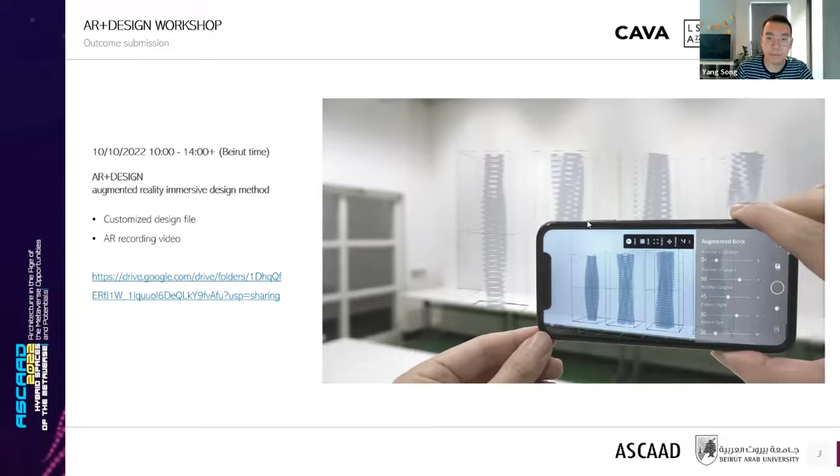Okay, so I will give a brief introduction about myself and my PhD research project in the University of Liverpool, because our workshop is a part of my preliminary research outcome.

So my name's Yang Song, and I got the master's degree of architecture from the Bartlett UCL, and I start to do the cross-disciplinary research related to architecture design and augmented reality technology. So now I'm a practice-based PhD student from the research group in CAVA, the Center of Architecture and Visual Arts, University of Liverpool.

So I continue my previous research direction and try to add the robotic fabrication technology into the AR-assisted workflow to explore the interaction between human, robots, and data and their mutual relationship through the immersive design to fabrication process.

So this research project is supervised by Professor Richard, who is the chair in architecture and visual arts. He is interested in digital database and immersive media, VR and AR technologies. And this research is also supervised by Asterios, who is the director of architecture school, and his research includes the parametric design, generative design, VR, AR, robotics, and digital fabrication.

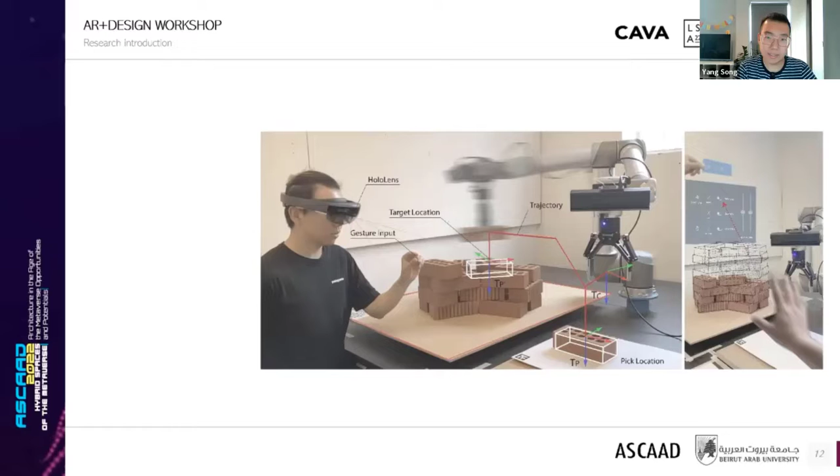The last phase is the AR-assisted human-robot collaboration method. We created a target location recognition system using the Kinect sensor RGBD camera to scan, recognize and analyze the brick location that needs to be picked in real time. Because I want to use this method on set, the bricks will be everywhere on set. I plugged the Kinect sensor into the robot, similarly to giving the robot eyes to see where the brick is, so we don't need any fixed feeding location to feed the bricks one by one. Instead, the robot can see where the brick is and just pick them automatically. So this is a method for the robot to read, and for the sensor to scan and try to extract the geometry of the brick.

After that, we also created a human-robot interactive collaboration method for adhesive application. The human worker can see the brick which is in operation as a white outline hologram, and also the area that needs the adhesive in red. So they just need to feed the adhesive in the red area and activate the robot to put the brick on. Actually, the red area is the overlapping area that's calculated by the computer. This method can avoid material waste and also keep the on-set environment clean.

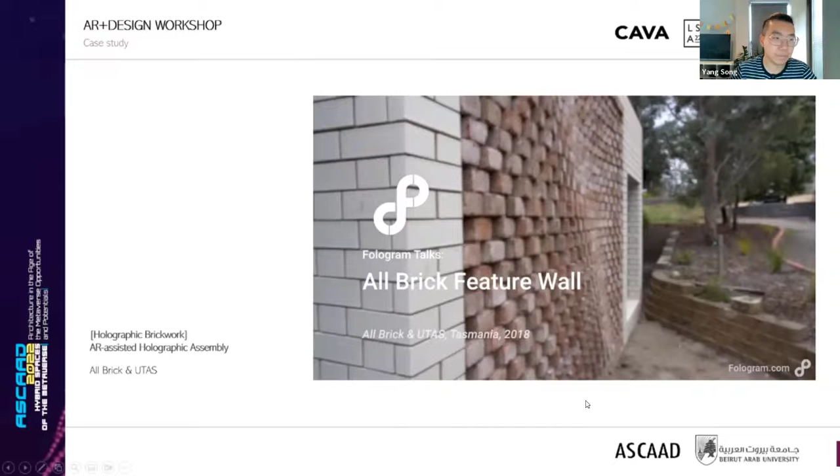University of Tasmania have been implementing Fologram in workshop scenarios, building complex brick structures, building complex timber structures, and working with it in a fabrication environment.

UTAS ran a workshop and invited Colin and his team at All Brick to come and try out the headset on some of the tricky geometry they were producing at the university. We heard that UTAS wanted to put the brickies to the test on this complex fabrication project, so we went down to see what they'd been up to.

There isn't a single brick on there that lines up to anything. Every brick is different. This would take you like 2 weeks, for one guy, and a lot of that would have to be made up, you know what I mean? You're not going to get it exactly like this would be.

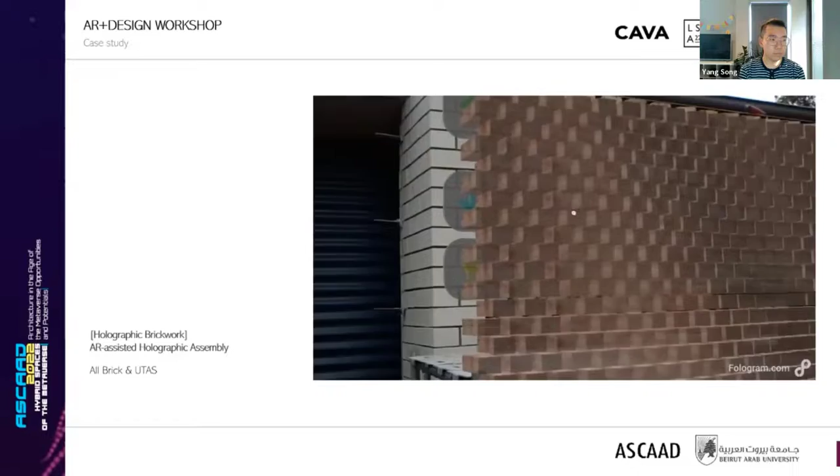UTAS provided a design model, and Colin used Fologram to turn that into a holographic instruction set. This lets Colin see the outline and precise placement of every single brick in the wall. Aside from using Fologram as an instruction set, Colin was also able to use it to train his apprentices.

So that's all the bricks, right? Yep, so see how you are here. That one's good. Yep, this one here shows it's got to come round. So just treat that like you do your string line all the way around. Mm-hmm, so hit that back.

It took us 2 bricklayers about 6.5 hours. The really exciting thing about this project is that now Colin and his team can approach architects and enable them to design more complex things, knowing that he has the capability to build them.

I was surprised by the accuracy and the fidelity to the digital model that Colin and his team were able to achieve. I'm really looking forward to seeing how Colin can work with architects to develop more complex structures, even more challenging than this one, and build them at a larger scale in permanent projects.

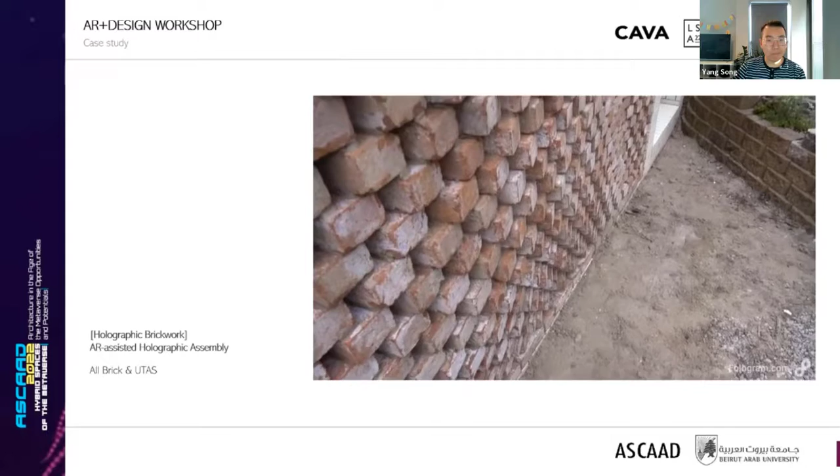I once seen a program on John Lennon, and he reckons every song he made, he used to get scared that he's going to stop now because he'll never make anything better than that. That's how I'm thinking - it's time to stop. I'm nervous that I can't make anything better.

The second case is the Steampunk pavilion, constructed from steam-bent hardwood using primitive hand tools, augmented with the precision of intelligent holographic guidance. The installation was built for the 5th edition of the Tallinn Architecture Biennale, ATB 2019, in Estonia. They were interested in approaches to hybridize analog construction with the precision and flexibility of digital models.

By rendering digital models as holographic overlays directly within the construction environment, the fabricator can use their own experience to produce highly complex objects entirely by following holographic guidance with relatively primitive analog tools. The timber elements in this structure are fabricated through the difficult process of steam bending, and each wood strip is backed, steamed, and bent over an adaptable frame of models, using the holographic models as a reference to the desired result.

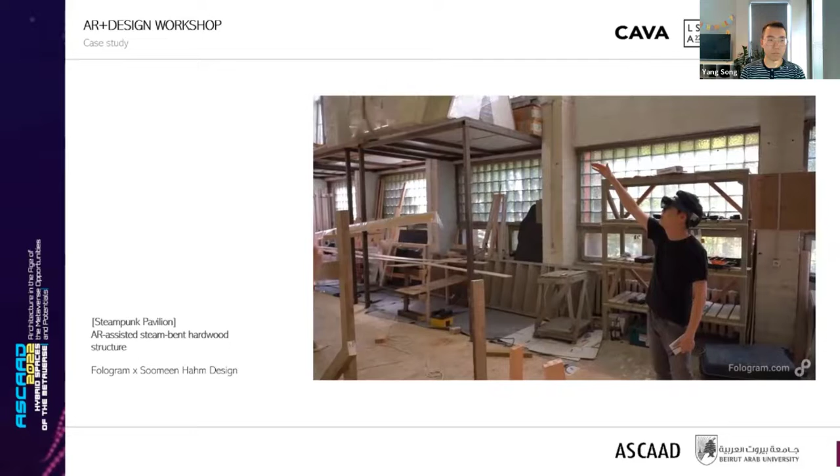Oh my god, here, it's up in here. I think it's almost 2 meters. Yeah, do you think we're going to be able to bend it over that? Let's try. Wow, this is not going to be easy.

Rather than working from drawings, a holographic model showed exactly where formwork needed to be placed in order to bend any of the curving timber strips in the design.

We added a holographic overlay to a metal bar bender in order to augment this cheap analog tool with the precision of digital models. A simple holographic interface was used to select and display the correct bend angles for each steel bracket in the structure.

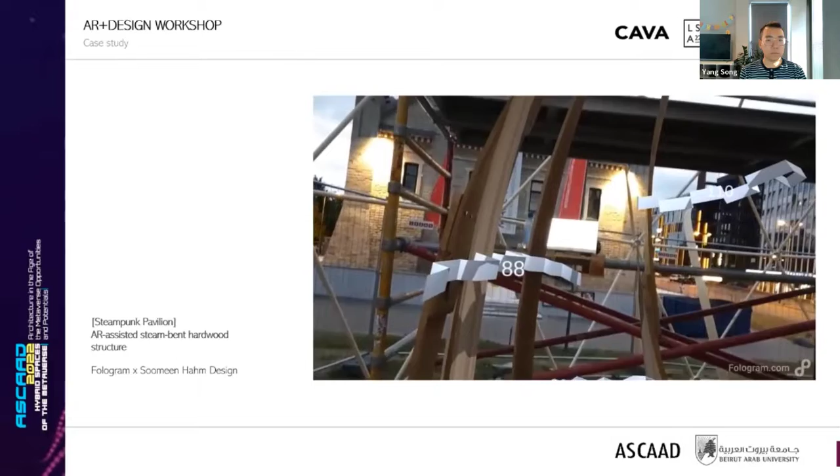These brackets were then located precisely in space using a holographic model overlaid directly on the construction site. This model provided a reference for what the pavilion should look like at any stage during construction, and we were surprised to find that small errors, either in the fabrication of parts or how these parts had been installed, were always able to be identified and corrected.

We, like everyone else, were expecting to have to change or simplify our design in order for it to be built. But we were surprised to find that by changing how we build, we're able to so significantly affect how and what we can design.

By combining precise digital models with adaptable human craftsmanship, we see exciting opportunities for traditional material practices to evolve. We're looking forward to seeing how other designers and architects can take Fologram's tools and begin to realize even more ambitious proposals, previously just the stuff of crazy dreams.

Yeah, and the third case study is a Build with Bark, which is a workshop done by Fologram. So they do the workshop in person because they need the AR headset to achieve that. So we can watch a video of what they are doing for that.

Australia has these incredible paperbark trees that get their name from the layers of thin bark that are kind of like this big stack of paper. Paperbark has an amazing variation in color and texture, and it's a completely renewable resource that you can find just about everywhere. I walk past these paperbark trees on my way to the office every single day, and then when I get into the office, there's even one right outside my window. It got me wondering whether we could build something with the bark.

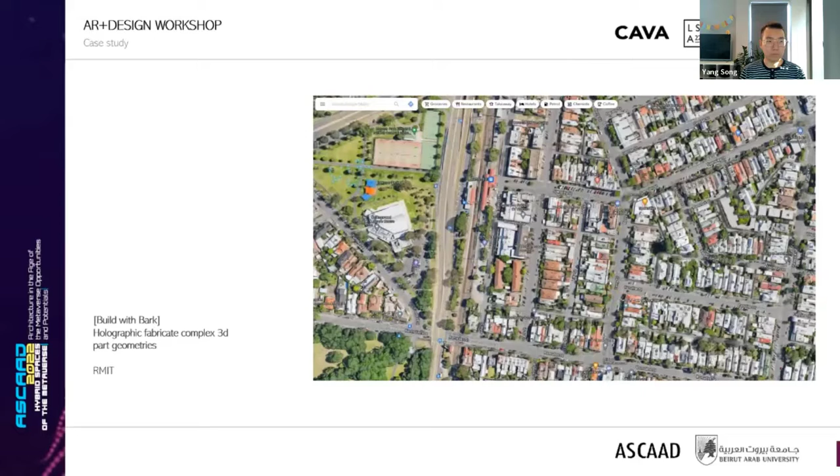So finding paperbark in Melbourne is pretty easy. You just check out a street on Google Street View, and if there's a melaleuca there, which is the scientific name for a paperbark tree, then you can go drop by and take a bit of material. It's really great being able to find all of the trees because then we only need to collect a small amount of material from each one, and that prevents us harming any of the trees by collecting too much bark.

Every single piece of bark is unique, and this is one reason why it would normally make such a crappy construction material. But in our case, this variation can also be an advantage. Different species and thicknesses of bark can be used to make a stiff but fragile curving frame that can then be covered with layers of laminated bark that become much stronger and start to hold their form.

For strength, whatever we design to be built out of paperbark needs to consist of a lot of areas of tight double curvature. This makes it pretty hard to design structures from paperbark just on the fly, making it up as you go, because you really need a guide while you're working, or everything just turns into a floppy mess.

Luckily, these curving forms are nice and easy to model in design software like Rhino, and together with architecture students from RMIT, we came up with a set of parts that fit together to form a bark wall. We used this digital model of the parts viewed in augmented reality as the guide that we needed for assembling bark into frames that were simultaneously clad to form nice stiff structures that could be transported into our office, where they're now a partition wall.

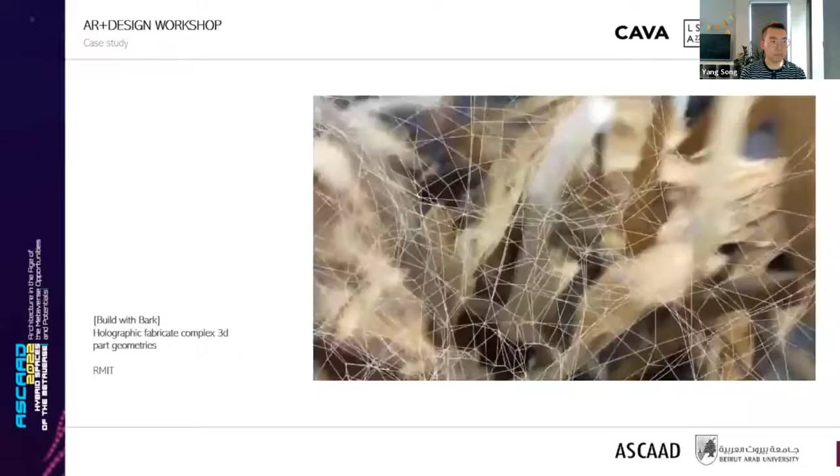Okay, so, yep. Here, clads from there to here. Yeah, so it goes sweep. Yeah, and then it goes a bit more. And then it tucks over and it donuts in here.

It's really hard to see what you're doing when you're only working from the wireframe in augmented reality, so we also used a depth camera on the HoloLens to scan the bark while we're assembling it and show how closely the bark matched our digital design.

The different colors and textures of the bark can be used to create a palette that doesn't exist in the digital model, which is just a flat grey surface, but is instead made up by the fabrication team on the fly. And so these sculptures capture both qualities of analog craft and the smooth curvature of the digital modeling software that was used to design them.

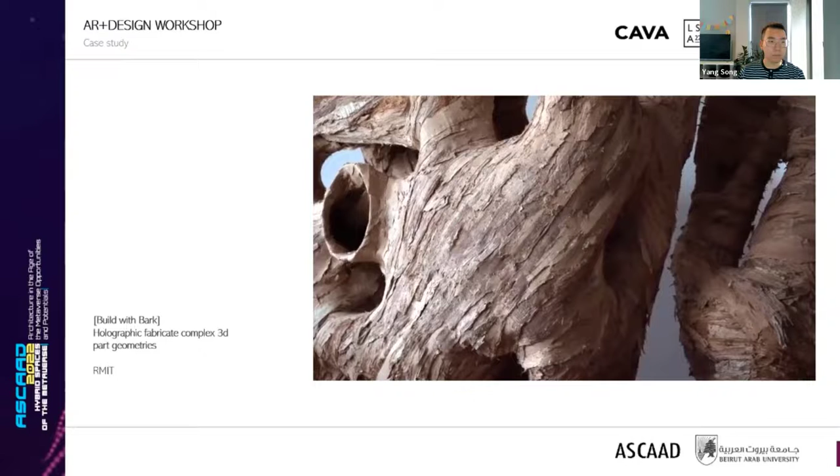This exact same technique of building curving structures from irregular materials in augmented reality could be applied to other found materials that are often overlooked, like river stones or other kind of granite material just collected from the bush, or branches from trees that have maybe fallen down and are irregular, unprocessed timber, or even material like bamboo in other parts of the world.

It could also work with conventional materials like strips of steel, and this might be a way to scale these processes up. Or, because the only tools required are the battery-powered HoloLens, some adhesive and some staples, continuing this project might involve taking the HoloLens to the bush and working directly with the bark on site rather than transporting the bark into our workshop and making a huge mess.

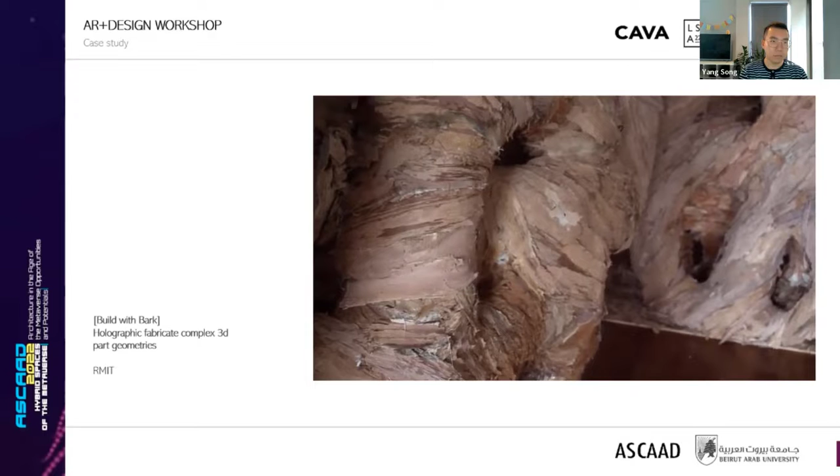And it would be amazing to randomly discover a strange bark shelter on a remote bushwalk somewhere, and this is the experience that we'd love to create.

So we saw three case studies done by Fologram in the AR environment because they are using Microsoft HoloLens. So they have more advanced input methods or interactive methods, including real-time scanning or hand gesture inputs, something that we cannot do on our mobile phone.

But today we're gonna just try a very basic interaction about the AR input, like the screen-based input for the AR immersive design.

And if you are interested in AR, you can check the website, I'm gonna show the website here, which is called Fologram. I will copy this link into our chat. So this is the Fologram website.

They will publish several things that they've done using augmented reality. And it is also a great tool for you to achieve AR design and also AR fabrication through Rhino and Grasshopper, which is very architecturally friendly. So you don't need any other software to help you, just this plugin.

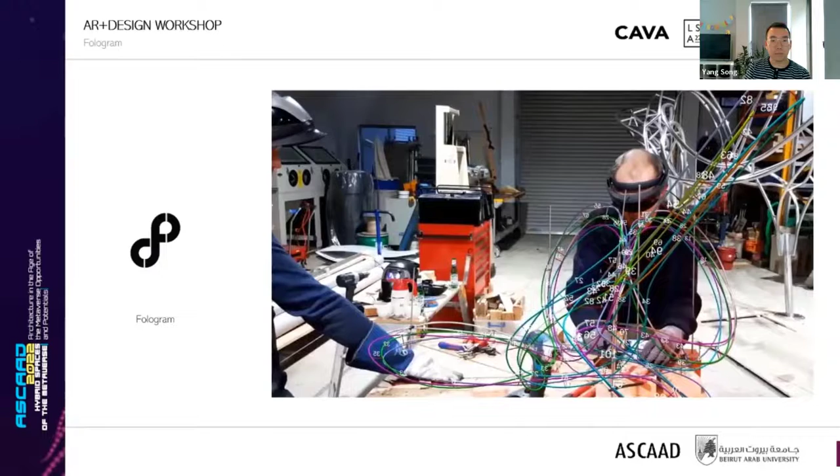Fologram is going to bring us into a new era of design. When you realise that what you're looking at is the thing that you're about to make, it almost becomes immediately intuitive. It's totally life-changing. To go from a sketch and then 3D modelling on the computer and then to produce this is just mind-boggling.

It's been exciting to see people realise ideas and designs which they thought would otherwise be impossible in minutes with Fologram. Drawings have always been seen as integral to the profession of architecture, but while they're incredibly good at describing two-dimensional geometries, they aren't good at describing non-planar geometries. Some of the models that we've been creating simply would not be possible to build in any other means.

So if you install the Fologram successfully, you will see a panel of the Fologram through your Rhino user interface on the right-hand side. If you cannot see that panel, just type in the command line Fologram and activate that.

So when you activate the Fologram panel, you will see a purple button here. Press the button and it will generate a QR code for you. You can use your Fologram app to scan this QR code to connect the laptop with your mobile phone.

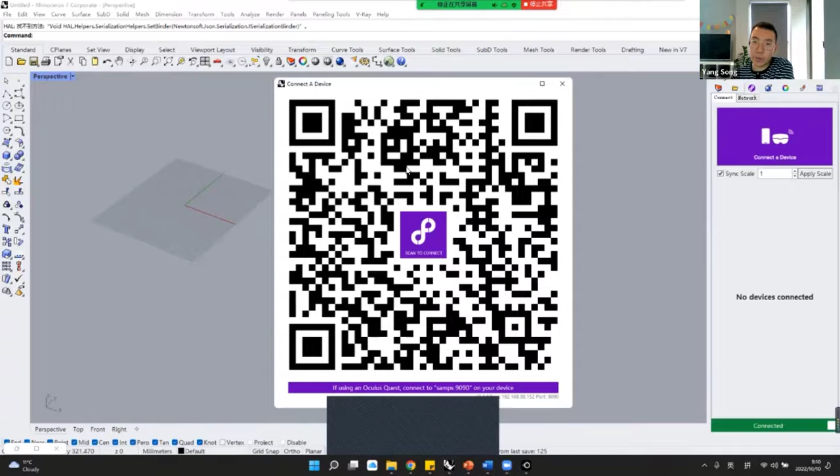Okay, this is Rhino. If you installed Fologram successfully, you will see a Fologram panel here. This is the button for us to generate the QR code. If you press that, there will be a QR code, and you can use a mobile phone to scan the QR code.

If you didn't see anything happen on this panel, just type Fologram to activate that. Maybe the first time you need to activate that first, and then you will see the panel here. You can also see a panel on the top, called Fologram, for you to activate the panel and also create QR code. So this is a great function.

Maybe some of you are thinking, if I put the virtual model in the physical world, where will it be located, or how can it be recognized? This QR code is a method for you to scan in the AR environment to locate your model. So to do that, click on create QR code.

They will ask you to input the origin. Normally we set the origin as 0,0,0. Then they will ask you the x-axis, just the x-axis same as Rhino, and a y-axis. So now you can see a QR code.

You can also choose the paper size to print the QR code, and here is a folder for you to save it. You can click the folder here and save the QR code. I'll just save it on the desktop and press enter. So the QR code will be generated and saved here.

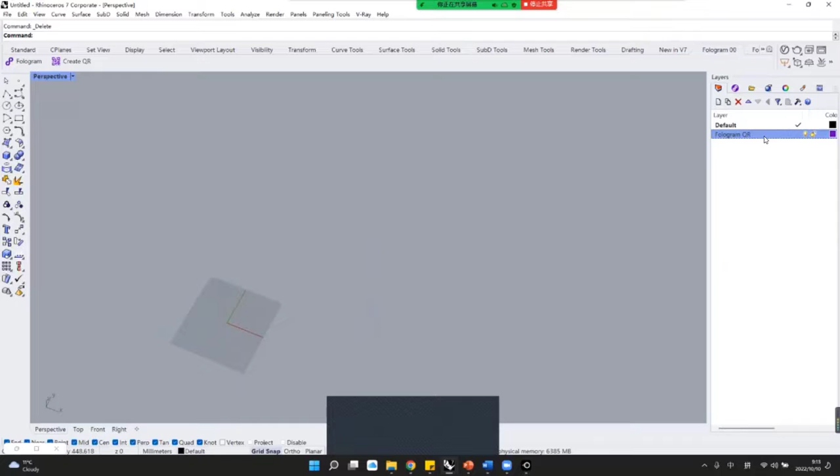I'm sorry, can you repeat from the set origin part? Okay, so this is a function on Fologram. Here is create QR code. Press that, and it asks you to set the QR code origin. You can use your mouse to set the origin as 0,0,0 here, at this corner.

If you want to be accurate, you can activate grid snap, so it will catch the 0,0,0 point automatically. Press your mouse here, that means you've set the origin. Then it asks you to set the x-axis, so just follow the Rhino x-axis. Press the mouse, and it will ask for the y-axis. Press the mouse, and here is the code.

For this input, you can set the paper size for printing, and this is the folder for you to save the QR code. You can select anywhere to save and press enter on your keyboard. Now the QR code is generated. You can print that and place it on the ground. When you scan the QR code through your mobile device, it will locate to the 0,0,0 point.

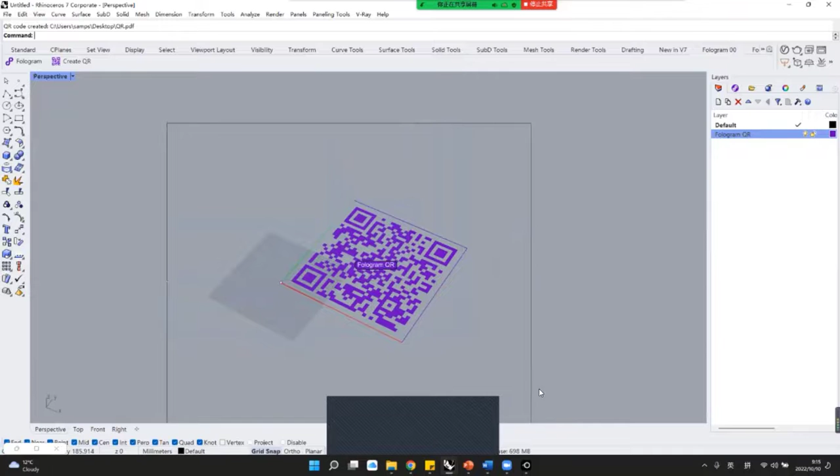It's because of your Wi-Fi settings. If that's not working, you can use your mobile data hotspot to connect your laptop and mobile phone. Okay, thank you. So this is the method for you to locate your model in the physical world. Yes, do you have any question?

Which version of Rhino are you using? It's Rhino 7 Corporate. Rhino 7 should work. You can just check the panel settings if the Fologram is not activated.

Okay, but when I type command Fologram, it gives me Fologram QR, Fologram update check, and when I press on Fologram QR, it gets me set QR code origin. That's the step you were explaining, but there is no icon for the Fologram popping up with the menus and other icons.

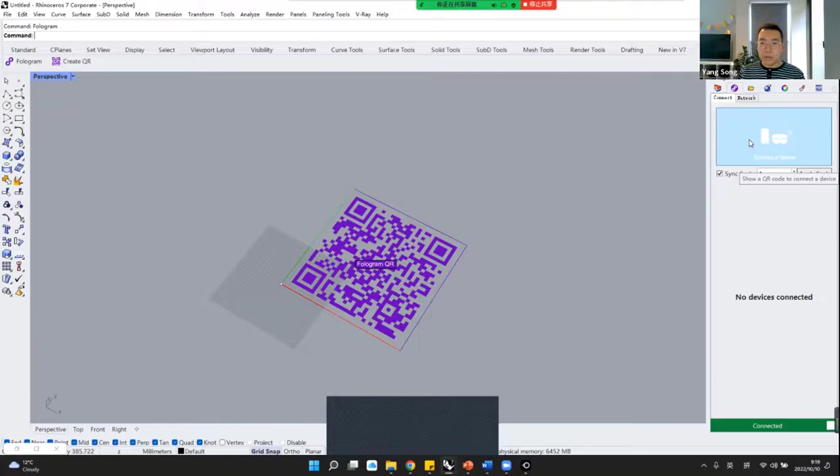No, I feel like the software is already installed because I connected with my phone, and my phone is giving me a hexagonal mesh for everything in my surroundings. That's why I knew Fologram is installed, because I scanned the QR code that was generated from my PC using the camera. Yes, using this. Yes, you can see that QR code. Yes. Okay, okay, so that should be fine.

You don't need to do that. This is a method icon, the method that I introduced for you to locate physical world with the digital model, but we don't need this function for now, for today. In the future, if you want to do any more accurate operations, you can use this kind of function. I'm just giving a basic introduction about the plugin.

Okay, thank you. So if you activate your Grasshopper, you will see the Fologram somewhere here. So these are the functions in the Fologram in Grasshopper. I'm gonna show you the first basic function: syncing objects, like how can we input the object into the AR environment?

For example, I'm gonna set a mesh. So you can choose mesh here, there is a mesh sphere. Press the mesh sphere here. It will ask you to input the base. We're going to use the default base as 0,0,0, and the radius, we're going to set the radius to 30. To set that, just double click anywhere you want, double click and input 30.

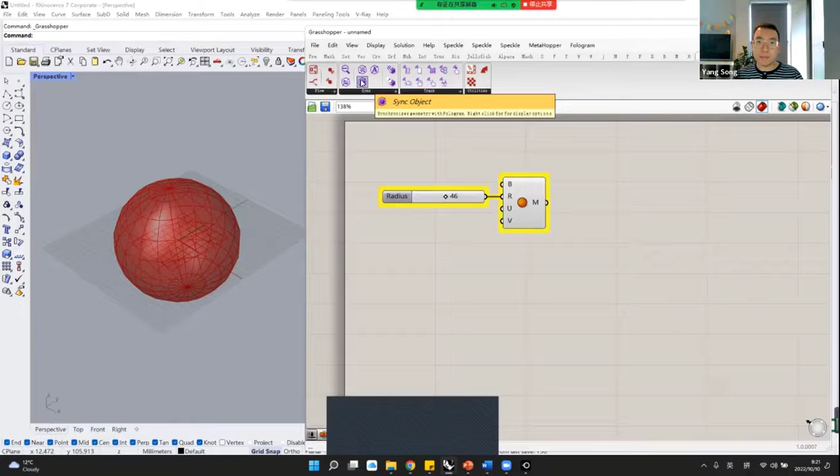You need a basic function from Fologram. Just press Fologram, and here is a sync object. Connect the sync object with your mesh. So actually now it is in the AR environment.

So I'm gonna show you how you can connect your mobile device to check this model in AR devices. I'm gonna share my mobile phone screen, one second. Yeah, so now you can see my mobile phone screen.

If you already installed the Fologram, you will see a Fologram here. Someone, can you mute? I will mute everyone. So you will see a Fologram app here. Just click this Fologram app.

And it asks you to scan the QR code. So for generating the QR code, press here, scan the QR code. Now you can see a mesh. The mesh means that your mobile phone is reading the environment. So you can tap on your mobile phone screen to set where you're gonna put this ball. I'm gonna just put that ball on my desk. So now you can see my ball is in the AR environment.

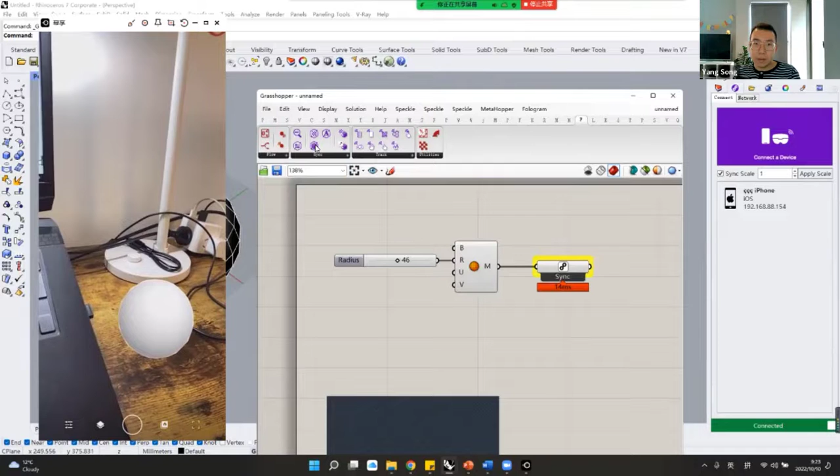Okay, so when you create a sphere here, find the function in Fologram in Grasshopper. There is a function called sync object here. If you press Fologram, choose the sync object, connect the output from M to the Fologram, and you will see your ball here.

I want to introduce something you can play with in this Fologram function. When you right-click that, you can see there is a function for you to play with the color. So actually, you can change the color of your sphere. And also, you can select a texture. I'm gonna maybe just randomly choose a photo. So now you can see your sphere has some interesting texture.

If you don't want that, just right-click, choose the texture again to delete the texture. So you can use that kind of function to play with the color, the texture, and also you can change the transparency here.

And there will be 3 more functions. Movable means if you click the movable, you can actually move your ball from the mobile screen. So for now, you can see I'm moving that from my mobile screen. This is a movable.

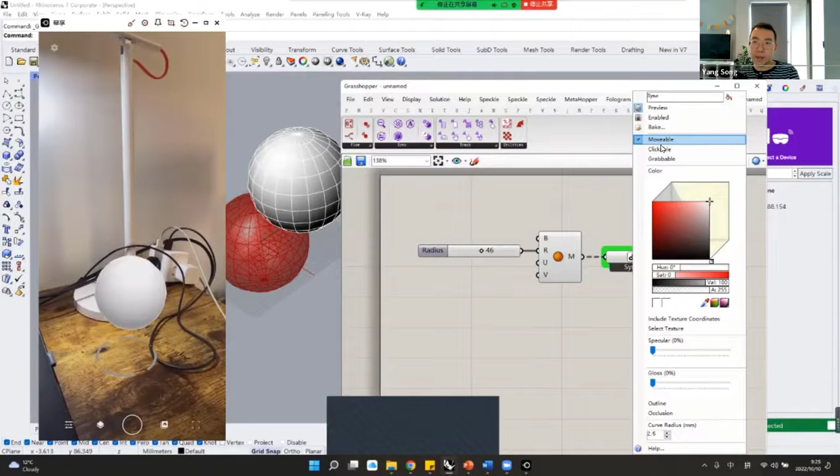So actually, you can see on Rhino, my ball is moving. So this is a function called movable. If you choose clickable, which means that the ball can be clicked.

So this is a function like if you have a series of balls, when you click one ball, you can get the index number of this ball. I will do that later. For now, you just need to know you can click this ball by choosing the clickable, and you can move that ball by choosing the movable.

And also you can grab the ball. But this one asks you to use the AR headset. We cannot do that through our mobile devices. So you can play with the first two for click and move. And also you can change the color, change the transparency, or add the texture for more fancy setting up.

So this is the first function that I'm gonna show you, which is the sync object. Please remember, for Fologram, it only reads mesh. So you need to create something from the mesh.

If you have some other geometry, just use a function called Mesh Brep here to change something into mesh. I will introduce that later. But for now, you need to remember that the Fologram reads mesh.

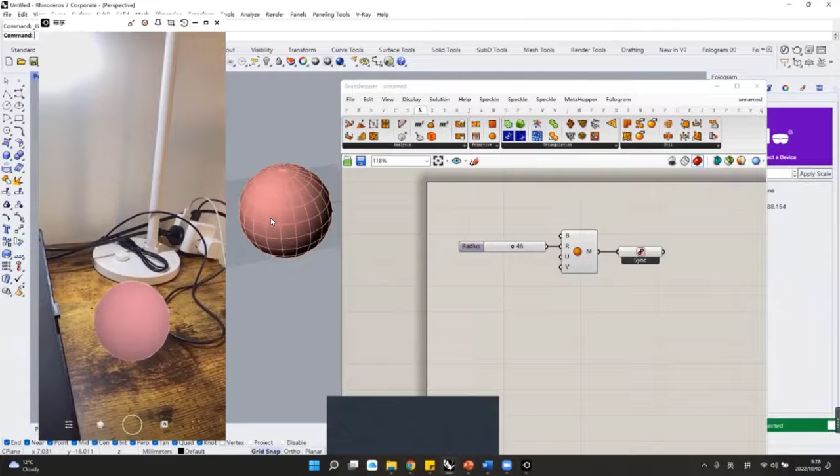So you can only see hexagons, but you cannot see your sphere? No, I can see it. I can see my sphere, and I can see the QR, like the rectangle perimeter of the QR code. The problem is that it's not as clean as your screen. It's always showing me the hexagons overlapping each other as if it's not really scanned.

Yeah, you can press the screen to select the surface, because the hexagon is scanning your surface. So if you want to put your sphere on the desk, you can just press on your mobile screen to press the desk. So the hexagon will disappear, which means that your sphere is snapped on the desk.

Thank you. Okay, so this is the first function that we're gonna try. And I will introduce a second function for you to try in the AR environment. So I'm gonna stop the mobile sharing.

Okay, the second one will be the syncing parameters. So we're gonna use the mesh sphere as well. Press here to create a mesh sphere, double click anywhere to input 30 as our radius.

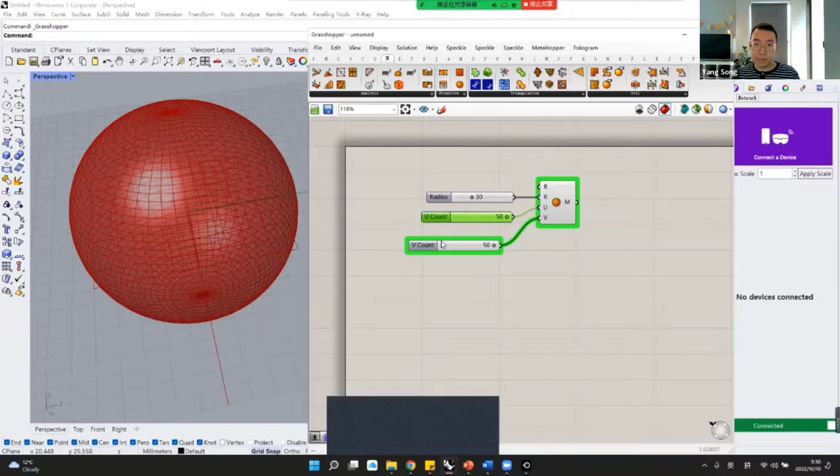So this is the way for you to create a sphere. And also we're gonna show the UV line. So how can we achieve that? In the mesh, here is a function called mesh edges. Just press that, connect the mesh with mesh edges.

And use Fologram sync object, show the sphere first, and sync object, show the edge. So I'm gonna set the sphere as white color, and I'm gonna set the edge as red color. So actually, in the AR environment, you can see a white sphere with red UV line.

And how to do the syncing parameters? There is a function called sync parameters. Press that, and you will see some Fologram logo on the interactive sliders. So you can activate the radius, activate the U and V.

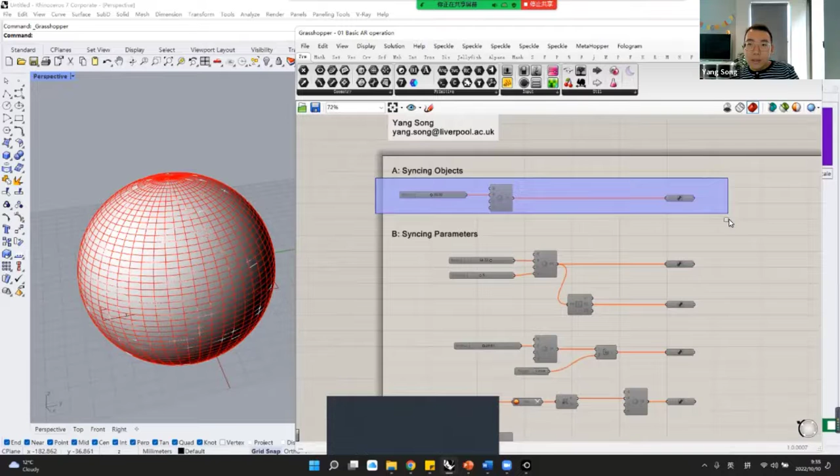This is the basic introduction, so you just need to get familiar with the function. For your own design, I will explain more clearly. There will be 1 or 2 parameters for you to play with, so don't worry about that. You don't need to develop anything in Grasshopper, you just need to play with it.

Okay, what I'm trying to show you is how you can input this kind of interactive sliders on your mobile device. I'm going to connect my mobile device again. I understand most of you don't know Grasshopper, but don't worry.

Now you can see my mobile screen. I will snap it on the top, press the Fologram app, scan the QR code. Yes, your sphere is here. So how can you achieve this kind of interactive parameters?

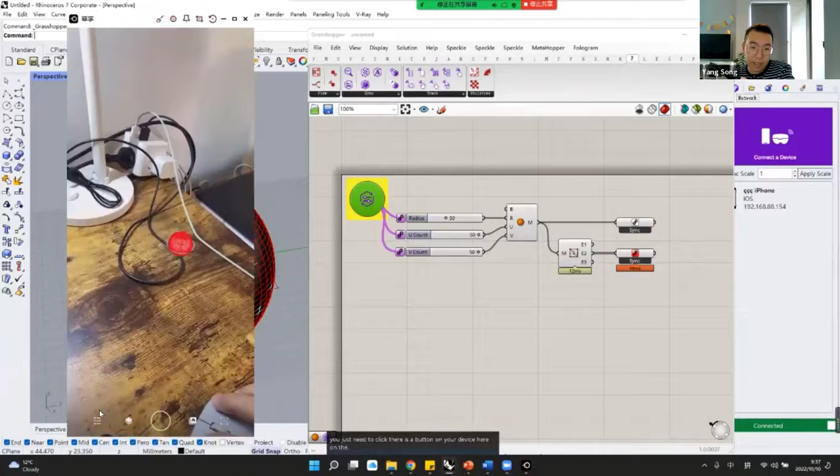You just need to click. There is a button on your AR device on the left-hand side. Click this button and you will see 3 sliders. Just play with the sliders and you can see your sphere is growing. It is very easy, and you can also change the UV line.

Excuse me, how did you connect the QR code again? Just as you connected it the first time? Yeah, to connect the QR code. Okay, I connected the QR code, but when I'm using the folder you gave us right now, you asked us to drag it to Grasshopper. It's not showing up on the Fologram on the phone. What's showing up is the initial sphere, the one I made.

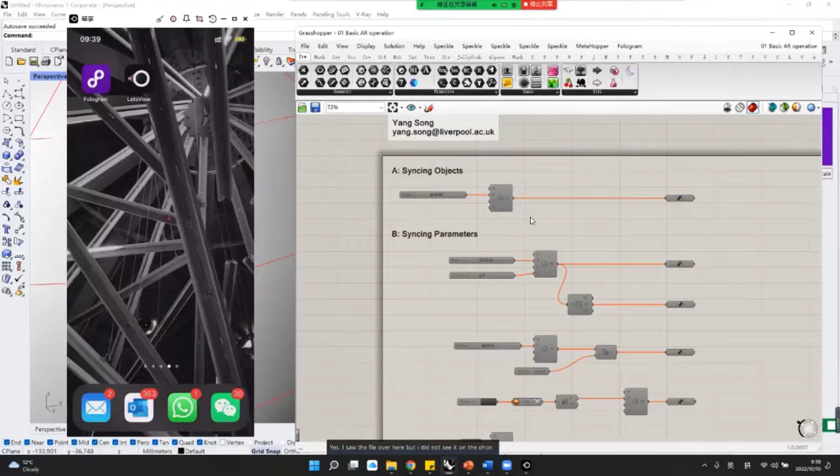One second, you mean you drag the file here and you cannot see the file? It won't happen that way, if you drag the file here you will see it. Yes, I saw the file over here, but I did not see it on the Fologram like you're seeing it on the phone, because the file is in Grasshopper. Okay, but now you reconnected it to the phone. It's not showing up on the phone right now, what's showing up is the initial sphere, not the folder you gave us. You need to stop your Fologram, just swipe that up and open it again. Oh okay, thank you.

Yeah, so this is a way for you to play with the interactive parameters. It's very fun. You can also try, if you have any Grasshopper knowledge, several other geometries like mesh box, mesh plane, mesh sphere, or some other things you create. It will be pretty easy for you to achieve in the AR environment.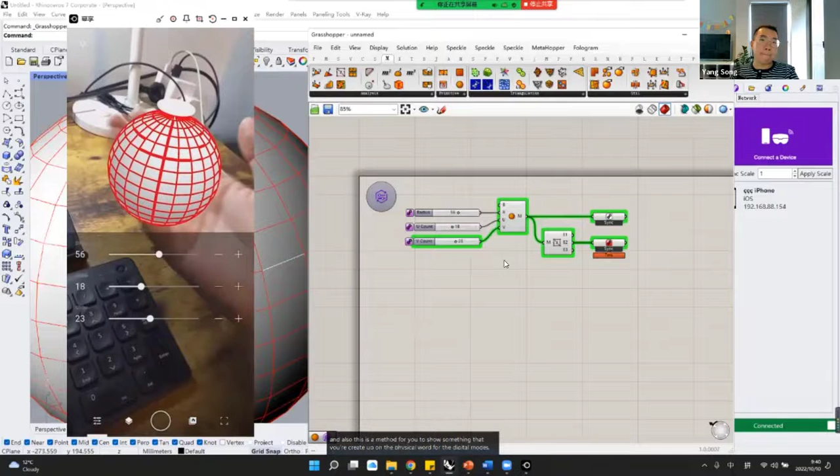This is also a method for you to show something that you create up on the physical world for the digital model. So remember, the function in Fologram called sync parameters gives you the possibility to take this kind of slider to the Fologram app, so you don't need to change that on Grasshopper, you can change it on your app. For the free version of Fologram app, you can only add 3 parameters. If you want more, you need to pay for the plugin and also pay for the app. But I think 3 parameters are enough for our workshop. So this is a method for syncing objects and also syncing parameters.

The next function that I'm gonna show you is... okay, I'll check... is syncing text. So how can we show the text in the AR environment?

First of all, we're gonna make a sphere. Press the mesh sphere, and we're gonna set the radius as 10. And we need to sync this, we need to show this sphere in AR environment. So we choose the function in Fologram, sync object, to show the sphere. And if we want to create a text, it will ask you for a reference point, so we're gonna use the sphere as a reference point.

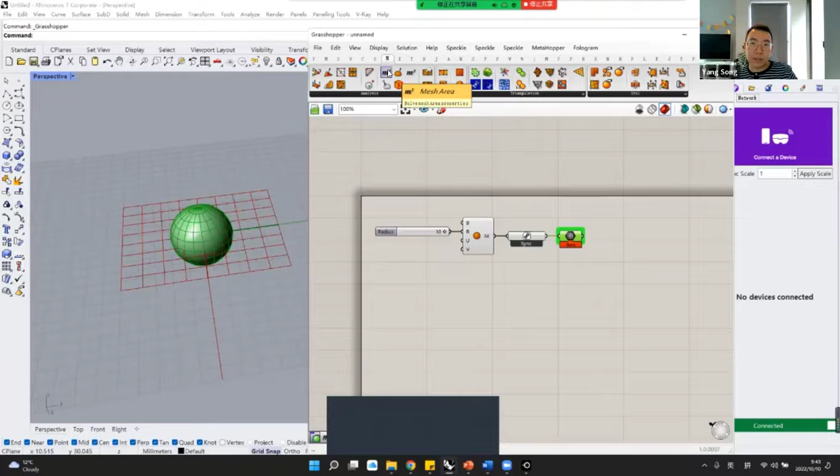So we go to the parameters, and there will be a function called mesh. Choose the mesh. And there will be another function called mesh area, which means it will get the central point of the mesh. Because now we have the mesh as a sphere, we need the central point as the reference. So now we got the reference and we got the sphere.

The last thing is to input the text. So we choose Fologram, there is a function called sync text. The T means text input, the P means reference point. So we're going to connect the C with the P, which means our reference point is the central point of the sphere, and the S means the text size. So we can double click at the empty area and input 50, which means the size of the text.

And if you want to input the text, go to the parameters. Here is a function called panel. Click the panel, double click to input the text that you want to show. I'm gonna say ASCAAD AR plus design workshop. So connect the text with the function here. You can see it shows the AR design workshop text, but I think it's too big, so I'm gonna reduce the size of the text to 20.

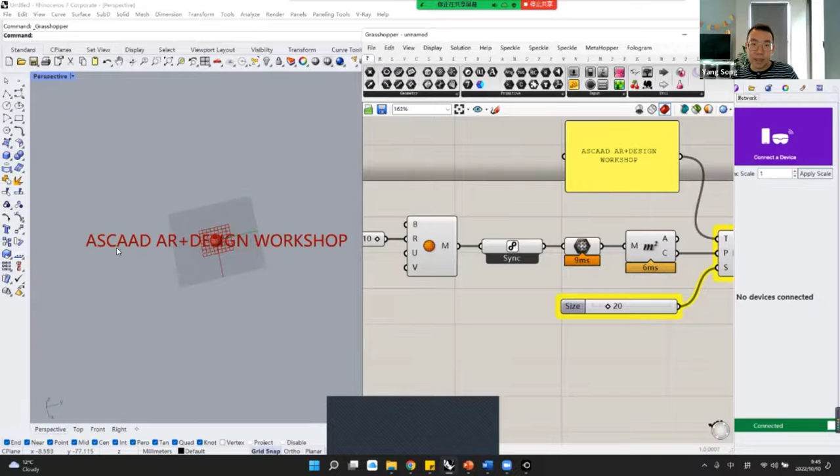So we can play with something more interesting, because remember before I introduced that the sphere can be moved. So we can right click here and choose that as movable. Actually in the AR environment, you can move the sphere anywhere you want, and the text will follow the sphere. So I'm gonna show you on my mobile device now.

I will connect my mobile device. Remember to restart your Fologram app anytime when you want to do a new thing, so it won't show you the previous design. So now I'm connecting my mobile device again.

Okay, this is my mobile screen. I'm gonna stop the Fologram and run it again. Snap the QR code, put my sphere on the desk. So for now, you can see there is a sphere and my text. Because I chose the sphere as movable, you can move the sphere through your mobile device. Maybe I will move it here, so you will see the text is following that.

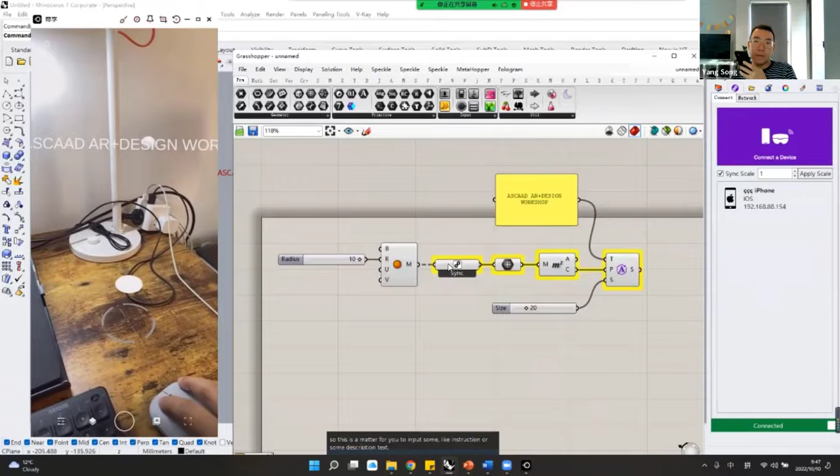So this is a method for you to input some instruction or description text. If you don't want to see the sphere, you can just reduce the radius, and the text will show by itself. So this is the way for you to show text. Now we already know how to see geometry and how to see text.

The next thing I want to show is that the Fologram gives you a function to track your own device. In the Fologram function, there is a function called connected devices. Press that, and there will be another function called track device. Press that, and connect the D with D.

So actually you can see on the Rhino file that your mobile phone is in the design software. It will change your physical mobile phone into the design environment, so you can real-time track your device. To get more interesting things, you can get the plane of your mobile phone, the mesh of your mobile phone, and also the central point of your mobile phone.

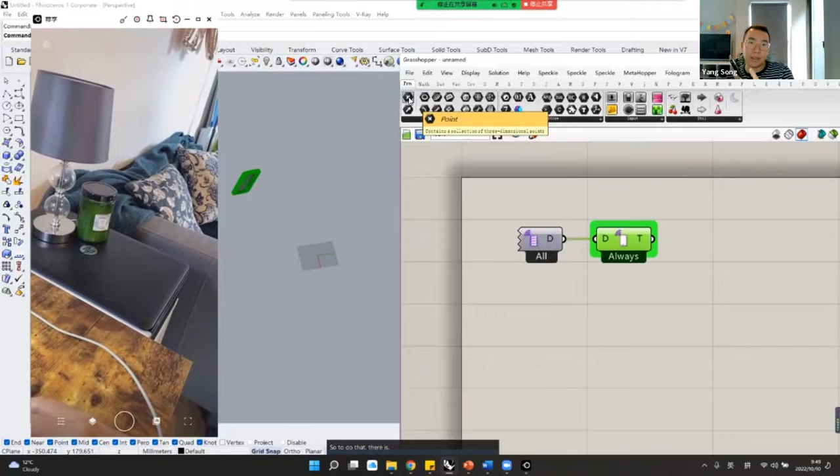To do that, there is a point in the parameter settings. Press the point to connect the T with the point, and this point will be the central point of your mobile phone. There is another function called plane - press the plane, connect the plane with the T, and if you zoom up, you can see your mobile phone plane, showing the x-axis and y-axis.

So you can use this method to set some points through your mobile phone, and actually it is recording your location. You can put your mobile phone somewhere and set connected points to create a curve or something, giving you interactive input methods. Fologram has this kind of function, but it's much more difficult than what we're going to learn today, so I won't introduce it fully, but you can know this is a method for you to input something with your mobile phone from the physical world into the digital design world.

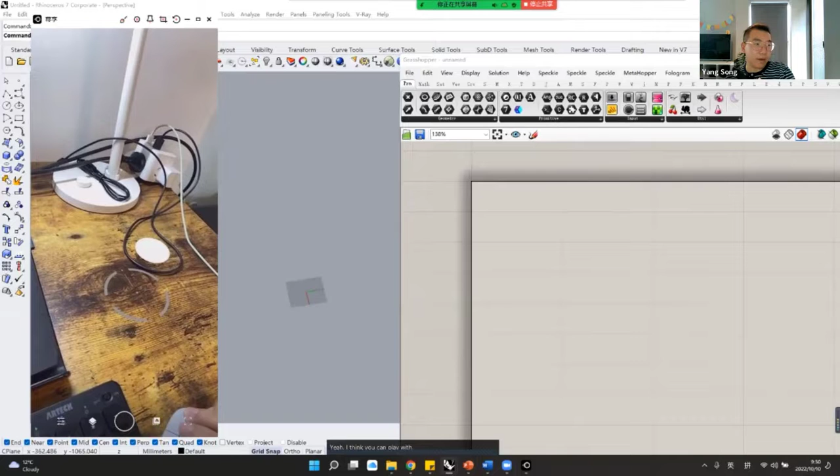I think you can play with the code that I shared with you - I shared more than I explained today. If you open my file, they will be here, and you can select all of them, press group on your mouse, and choose enable so you can activate this script to play with it.

This is showing objects, and disabling them to see the second one: syncing parameters, and also syncing text, and also interactive objects. I'm going to show you the interactive objects.

If you enable them, you will see a series of balls. This function gives you the possibility that if you press one ball, you can get the index number of that ball - meaning you are pressing ball number 2. So this is ball number 0, 1, 2, 3, 4, 5. Like that one is 10, and that one is 15.

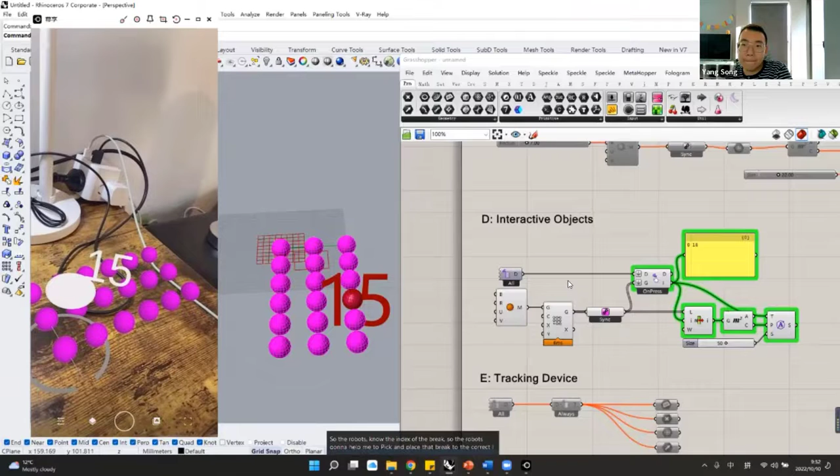This is a function that I use for robotic fabrication. For example, if I have a brick tower or a brick column, I can just press the brick which I want to do, so the robot knows the index of the brick, and the robot helps me pick and place that brick to the correct location. So these are many interesting functions that you can create or play with in the Fologram.

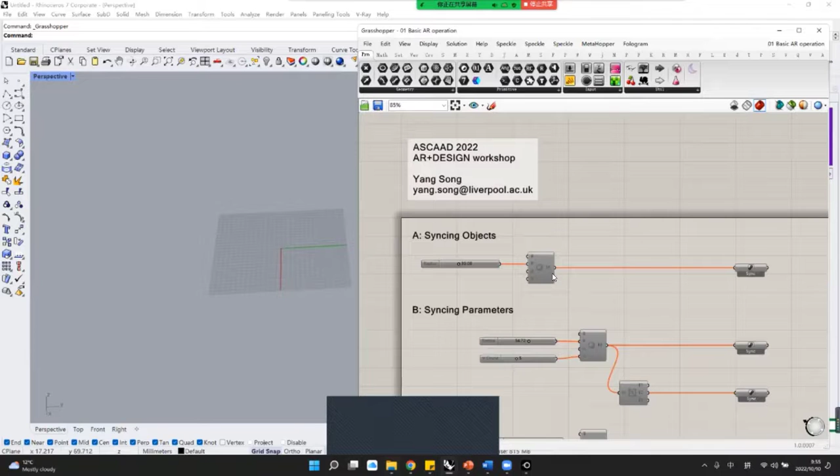Let me check, I'm going to stop sharing my screen. Can you share your screen to me? Yes, sure. I can't share my screen. You did not disable the... okay, now I can share.

Okay, can you see my screen now? It's loading, one second. Yes, I can see. Is the Grasshopper shown? I think you locked them. Press the unlock.

How can I unlock? Press your scroll, the scroll mouse. Yes, unlock them. Okay, thank you. Yeah, I think you enabled all of them, so try to disable all of them and enable them one by one.

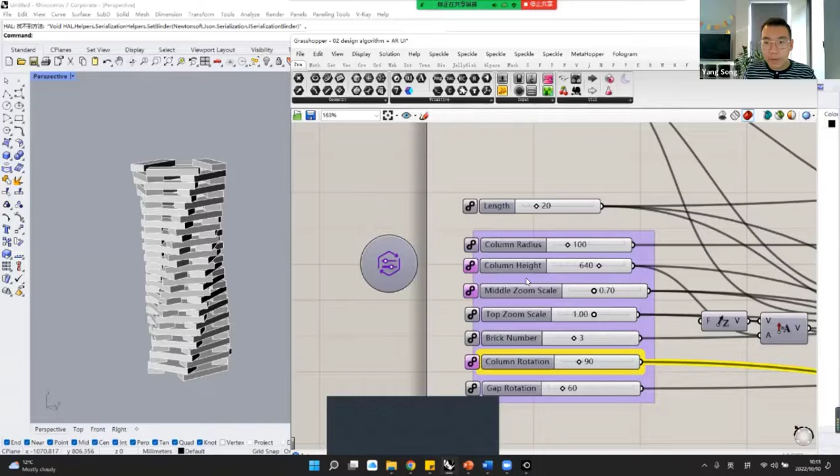And if you want to do more fancy things, you can change something here at the end, the texturing parameters. For now, it is white, so you can change that to any color you want, or you can select the texture.

If you want to make a wood column, you can download some wood texture. If you want a brick column, you can download some brick texture or some concrete texture. Select that and apply the texture on your own structure.

So if you don't have any Grasshopper skill, you can play with the preview color and texture, and also play with the parameter sliders.

But I'm gonna explain the process step by step, how I can create this kind of structure. So you just need to listen and follow my logic.

It will be easy, just take it easy, just follow the logic. This is for the no-skill user for Grasshopper.

If you have any skill in using Grasshopper, I will describe that later, so you can change something. You can create some fancy shape instead of my basic brick to input that geometry into the column generation. And also you can select different types of bricks or different types of geometry to apply different colors for them.

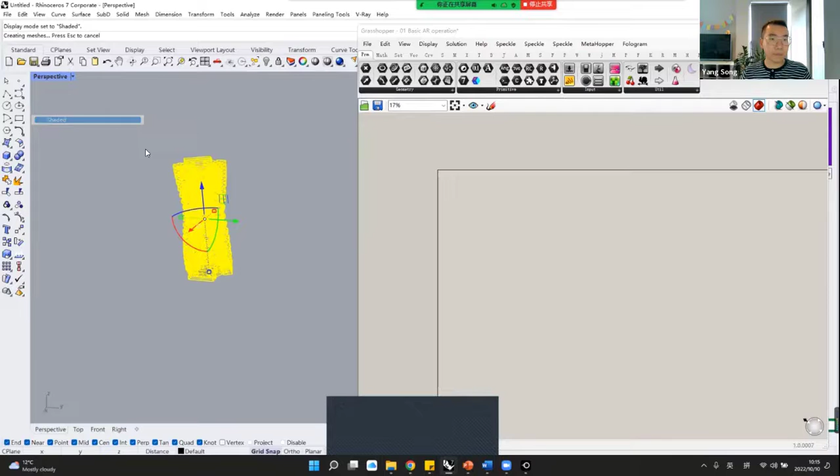So this is a brick column. How can we achieve that in a parametric design method?

First, you need to find a middle point. I will use 0, 0, 0 as the middle point. This is the first step in the parametric logic. Next, you're gonna create a circle around this point, which describes the radius of the column. Then you're gonna duplicate this point to the sky, which is the height of your column. So this is the height of your column.

And you're gonna divide your column according to the brick height. For me, the height of my brick is 20 millimeters, so I will divide this line with the length of 20 millimeters. So you will see several layers. After that, just duplicate this circle curve onto that point, and you will generate a column like that. So I will do that step by step.

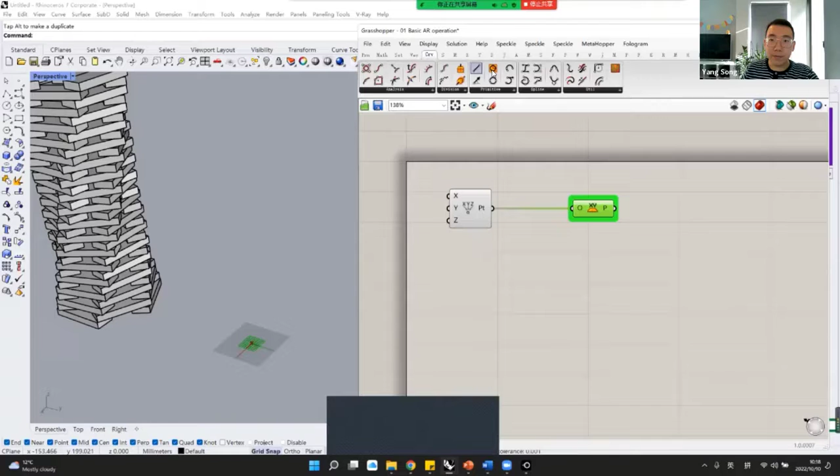Next, we're gonna draw a circle. So we use a function in curve called circle. Connect this point to P, which defines the middle point of the circle as 0, 0, 0, and input R as the radius. I'm gonna set the radius as maybe 200 -- that's too much. So you can double click and re-input any number. I'm gonna set that as 100.

So right click here to rename that. I'm gonna name it as column radius. So this is the radius of my column.

Next, I'm gonna move this point to the sky. The function to move this point is in transform, called move. So we click this function. This is asking you for the geometry that you want to move, so just connect this point to the geometry. And you need to tell it the direction and how long you're going to move.

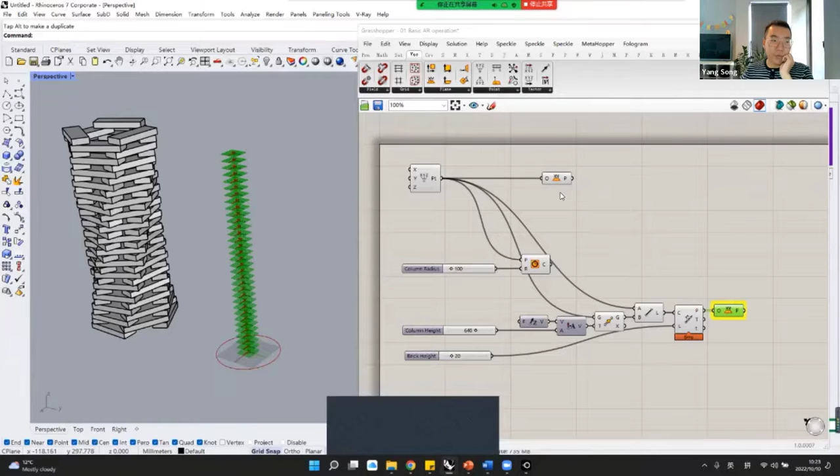So for now, we can duplicate all the circles along the point. How do we do that? There is a function in transform called orient, where G means the geometry that you want to duplicate, A means the reference plane of that geometry, and B means the target plane of that geometry. We connect the circle to the geometry because this is what we want to duplicate, and the reference plane of the circle will be the 0, 0, 0 plane, so we connect that to A. The target plane will be these 33 planes, so we connect them here. Now you can see we have already duplicated all the curves, all the circles.

Let me show my pen. So for now, you can see from the structure I did, there is a small curvature on the set line, but now for us it is straight. So we need a method to scale the curve down to make it as that, to create a small curve. So how to do that?

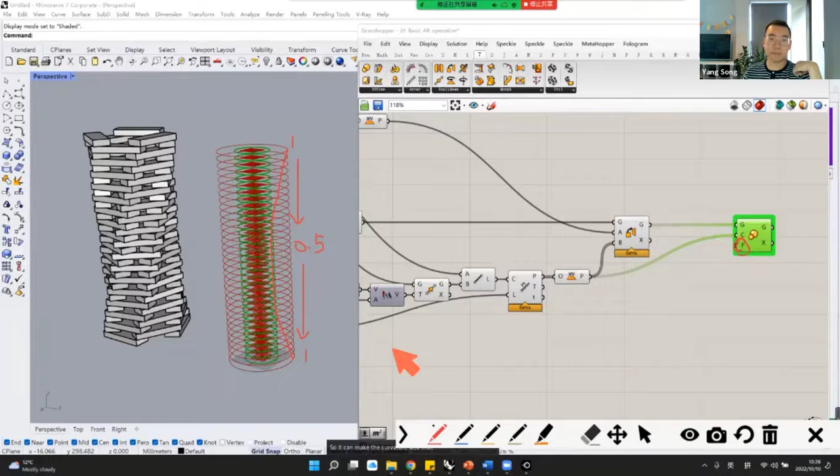So we need to set something here. The scale gonna be from 1 to 0.5 and back to 1. So it can make the curvature like that. So how can we do that?

We're gonna use a method called list length. So it will calculate how many points we have. So we connect the point here. As it outputs, it shows us we have 33 points, which means that we have 33 circles. So we need to divide the 33.

There is a function in math called division. So we divide the 33 by 2. So the result will be 16.5, but we cannot use any float. We need to change that into integers.

So there is an integer function in the parameters here. We connect the integer to the output. So it will change the 16.5 to 17, which means that from 0 to 17 is half of our column. And we need to create another half from 17 to 33.

So how can we do that? There is a function in math, we need a subtraction. This is the total number we have, which is 33. We connect it to the A, and we connect the result of the first half to the B. So the result will be 16, which will be the rest.

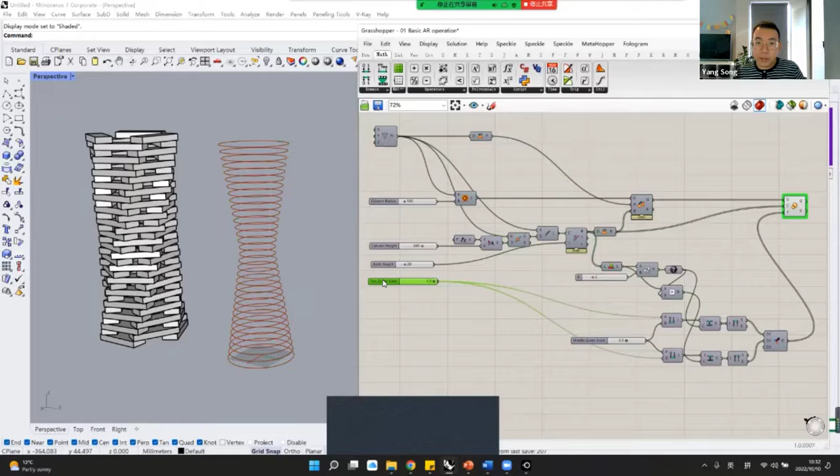To see that clearly, I'm gonna blend all of the previous functions so we can see that more clearly. Just select all of them, press group, and choose Disable Preview, so you can only see that. And we're gonna extract the parameters to one set, so we can play with that in the AR environment later.

So for now, you can see if you choose the middle zoom scale, actually the column is changing. Right, so for the better shape, I'm gonna set that to 0.7.

For the next step, we're gonna create some plane on the circle to transform the brick shape to our column. So how do we do that?

There is a function in vector, a function in curve called horizontal frames. Choose that and connect it with G. Because we haven't set the number, the default number is 10, but you can change that number to whatever you want. For me, because I have like 3 bricks for each layer, I'm gonna set N as 3. So now you can see we have 3 bricks in each layer. If you play with that, you can achieve 4 bricks, 5, 6, whatever.

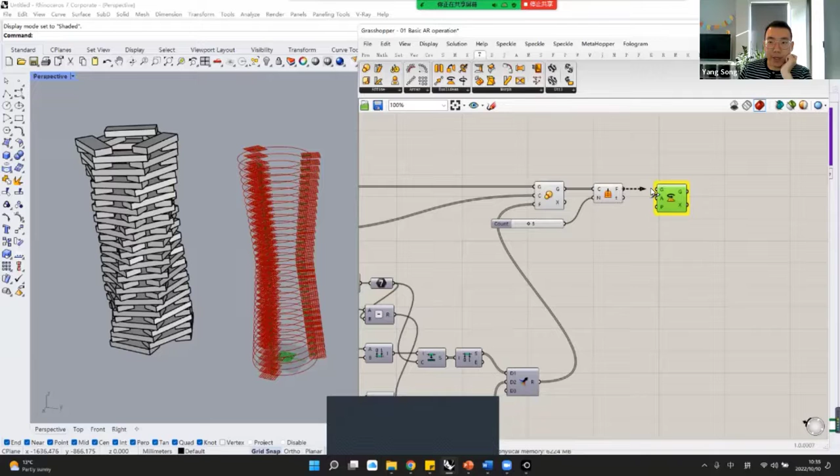We're gonna use a function in transform called rotate. This will ask you for the geometry you want to rotate, the degree you're gonna set, and also the plane. We're gonna set the geometry as the frame because we want to rotate the frame. For now, you need to right-click at the A to change this into degrees. So for example, if I choose 90 degrees, you can see it's rotating from 0 to 90.

But they are all rotating together, which we don't want. We just want it to rotate step by step, one by one. So we need to create a series. Let me create that. You can double click to set the total rotation, so for me I'm gonna set it as 90. Let me rename it as column rotation, which means this is the rotation.

We're gonna divide this rotation into layers because we have 33 layers, and for each step they're gonna rotate 90 total. So we use a function in math called division. We're gonna divide 90 degrees by 33 layers, since we got the 33 from here, so we connect the L to the B, which means in each layer we only need to rotate 2.7272, something like that.

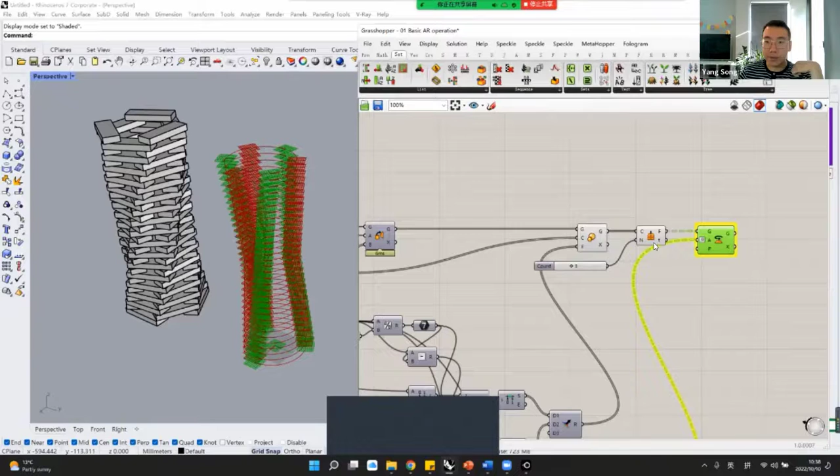So I'm gonna blend all the previous things. I can rename it as brick number and put that slider in front. I've already renamed that, so I put that here. So now we have the plane.

The next thing, we're gonna create our brick to put the brick onto our planes. There's a function in surface called center box. The brick size of mine is 150, 50, and 20. Because we've already created 20, I just connect this 20 to the Z. Z means the height, this is the length, the width. So now you can see this is my brick.

But there's some tricky thing with this function. If you set 150 to the X, it will create 150 on both sides, so actually the brick size is double. We need to right-click here to give expressions, which is X divided by 2. Also Y is X divided by 2, and Z is X divided by 2. So now we have our brick.

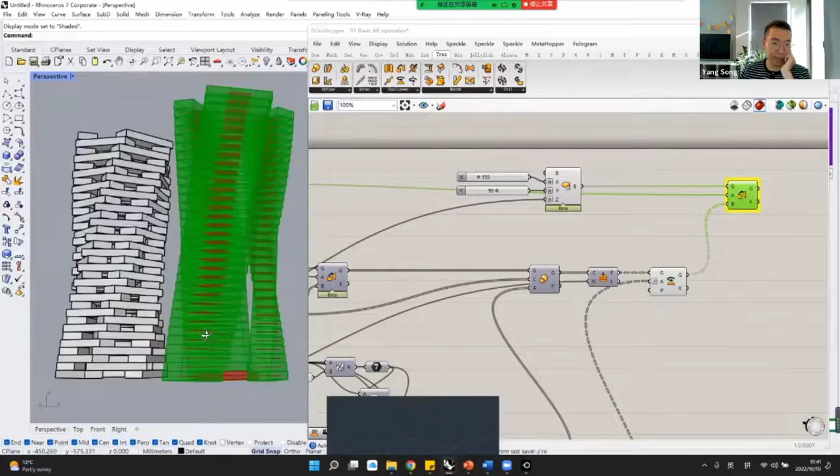So the method for me to do now is to get layer 0, 2, 4, 6, 8, 10, and so on as one group, and layer 1, 3, 5, 7, 9, 11 as the other group. So let's do that.

There is a function in the set which is called Flip Matrix. Select that, connect the Flip Matrix here, and there is another function called Dispatch. Connect the D with the L, and they will give you 2 groups output.

We can preview that by using a geometry component. Connect the geometry with A, connect that geometry with B. So you can see we have already grouped them into 2 groups.

The thing is that we just need to rotate this one to make the brick in the middle. So I'm gonna use a function in Transform called Rotate. Rotate this brick, and we can set a rotation. Right click at the A, change that to degrees, and we're gonna set it to 60.

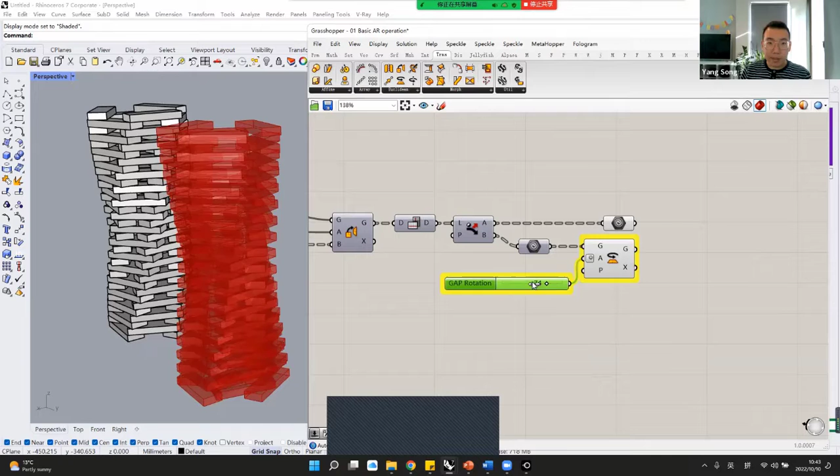Rotation, which means that you can play with the gap rotation. So I'm gonna put that slider in front, so we have this kind of slider for you to play with in the AR environment.

To preview the outcome, we need a function called Merge. So we connect the geometry together, and I blend all of them.

And I use the function in Fologram which we learned in the previous session, called Sync Object, connected here. So now you can see your object in the AR environment.

I'm gonna show you how to modify that through the AR environment, which is the process that you're gonna record for your submission. So actually you don't need to know all the process, I just explained the logic for me to generate the column.

From now you need to pay attention to know what kind of things you're gonna play with for the submission. So I will show you from my mobile screen.

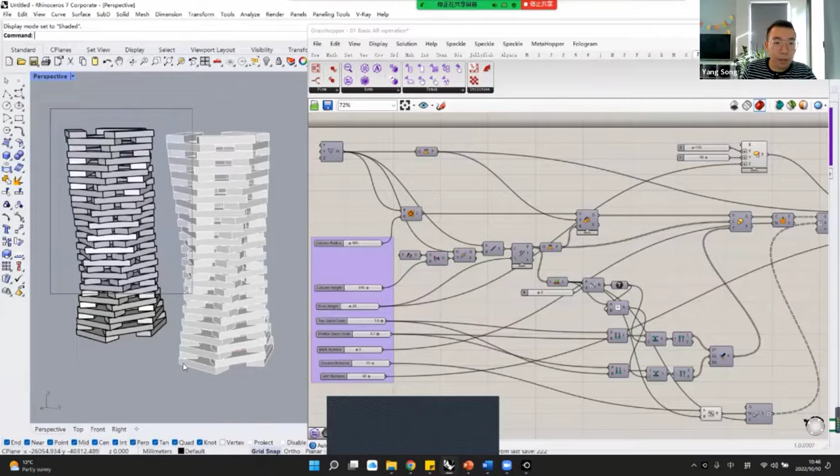For now, I will show you. I will delete that. So this is the thing you're gonna see from my file if you drag the file into your Grasshopper.

So you're gonna see something like that, and you can activate the Fologram, scan the QR. Maybe I'm gonna place my brick structure on the ground. Yes, so for now you can see the structure is here.

Yes, and the function is called Sync Object, Sync Parameters, which for us is to get this kind of sliders into our mobile phone. So I'm gonna choose column height, and also middle zoom scale, and also column rotation.

For now, when you click the left-hand side button, you will see the 3 operation sliders. So you can just play with the height, play with the middle zoom scale.

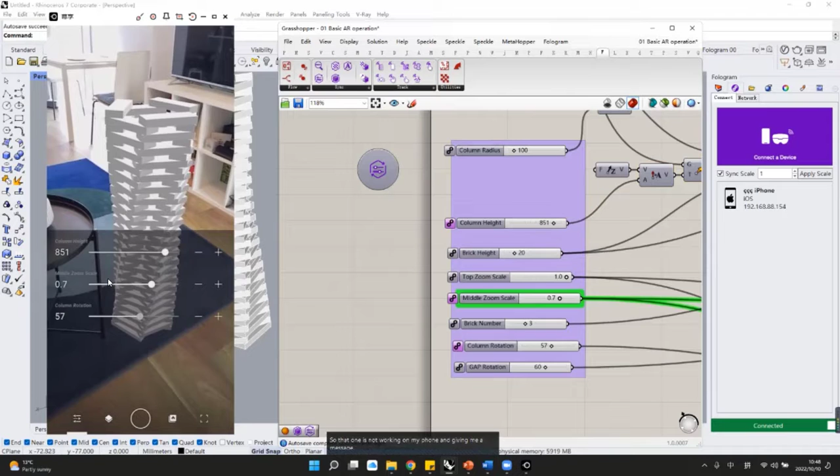Sorry, that one is not working on my phone, and it's giving me a message. It says to add parameter to this panel, create a synchronized parameter component in Grasshopper and click the Fologram icon next to any slider. Yes, because I think you haven't connected that.

Please try if this one has already been connected in Grasshopper. This one? Yes, this one. You can find it in Grasshopper in the Fologram, here, which is called Sync Parameters. Click that, you will see the button like that, and click the one you're gonna input into your mobile phone. Just click here to light it up, so you can select like 3 sliders.

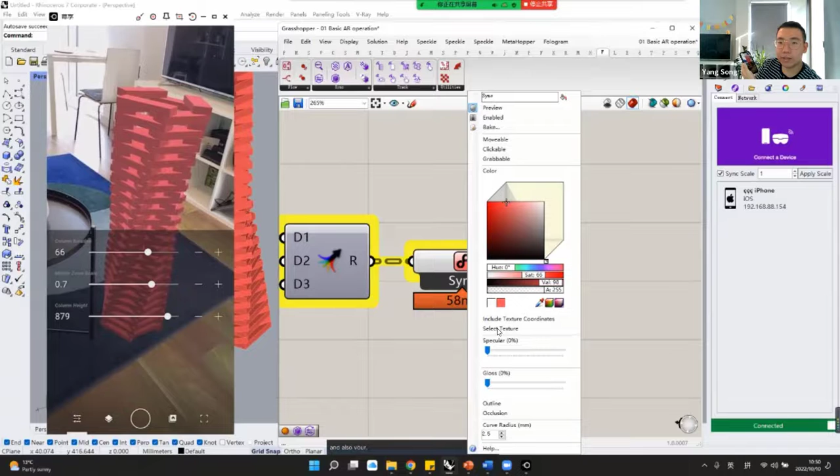Just record your screen to show that you can play with the sliders to modify your design, and also walk around your design to see it 360 degrees, or see it from the top and go through it. If you want to do something more fancy, you can change the colors as well, and also add textures.

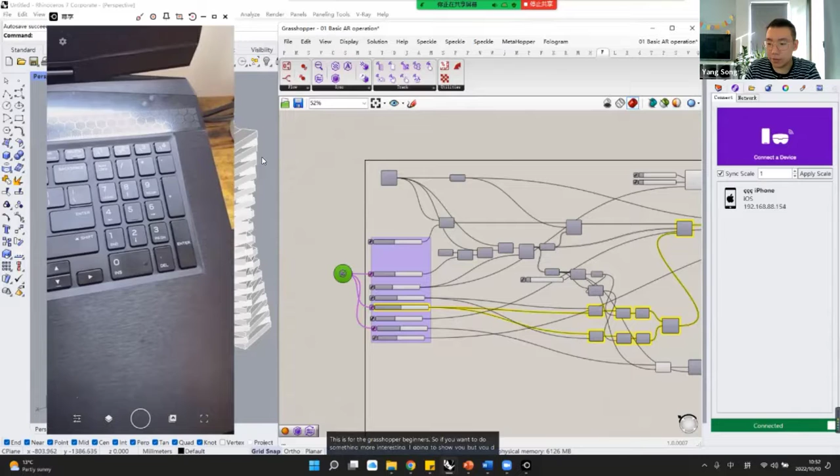So if you want to do something more interesting, I'm going to show you, but you don't need to do that. If you are very familiar with Grasshopper, you are very welcome to develop your own structure. So for example, I'm going to show you something more interesting.

Let me stop my mobile screen. So if you have my file, just press and drag that into Grasshopper. You can actually see this is the file that I'm sharing with you, and you can play with that. And if you use this function, you can create something more fancy.

So for example, I'm going to create some other shape. Maybe I can draw a sphere here.

Sorry, Doctor? Yes. When I drag the file, they ask me to install something. Install what? It didn't appear. Can I show you? Yeah. Let me stop sharing.

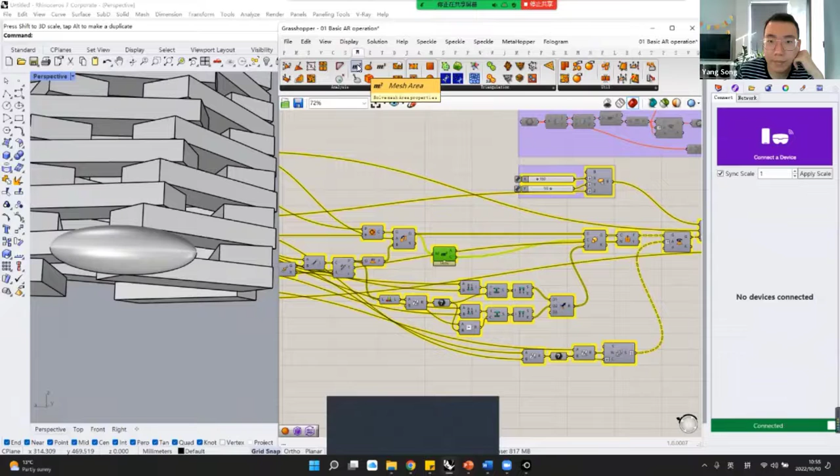If that happens, it means you are missing this function. So you can go to mesh, choose this one, mesh area. Can you find this component? Okay, thank you.

What if we can't find mesh area? I can't find it on my laptop. You can't find that? No. Or you can choose this one, mesh volume.

May I show you my screen? Yeah, yeah. Is it shown up? Yeah, yeah, I can see your screen. Okay, can you see now? Yeah, there is a white component which is the missing one. Yes. But I can't find the mesh here. Let me check.

You can double click at the empty place, just double click, not here. Type mesh. Okay, check, one second. Type mesh area if you can find it. MESHAREA, yes I can find it. Mesh area, so there's no mesh area in your Grasshopper. Yeah, there is, so just click that. Okay, to replace, connect the G with the G and connect the C with the C. For now you will be able to see that, because of the version of Grasshopper there's some little problem about that.

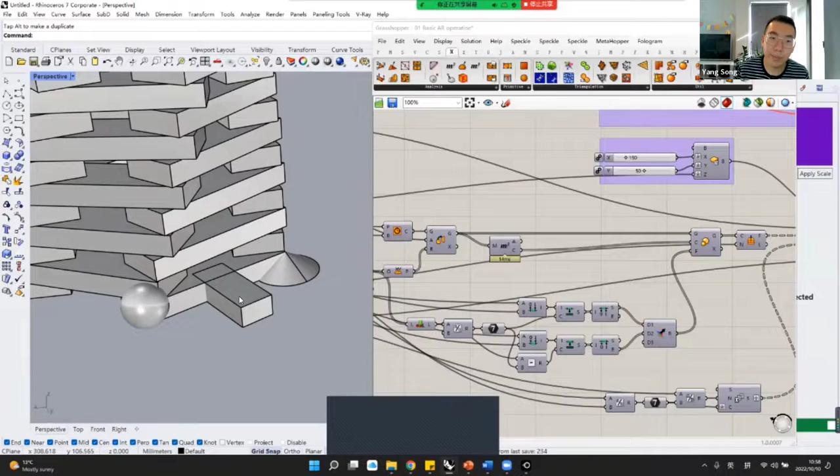It won't be beautiful, but I just want to show you what you can do. You can enable this kind of component and right-click at the geometry. Choose Set Multiple Geometry, select the box, the sphere, the ball, this box, and the cone together, then right-click Set Multiple Geometry. So they will be shown here, and you can get your geometries and also the reference plane.

So to blend all of them, this is the reference plane and this is the geometry. So connect this geometry instead of my box, and connect this reference plane instead of my plane.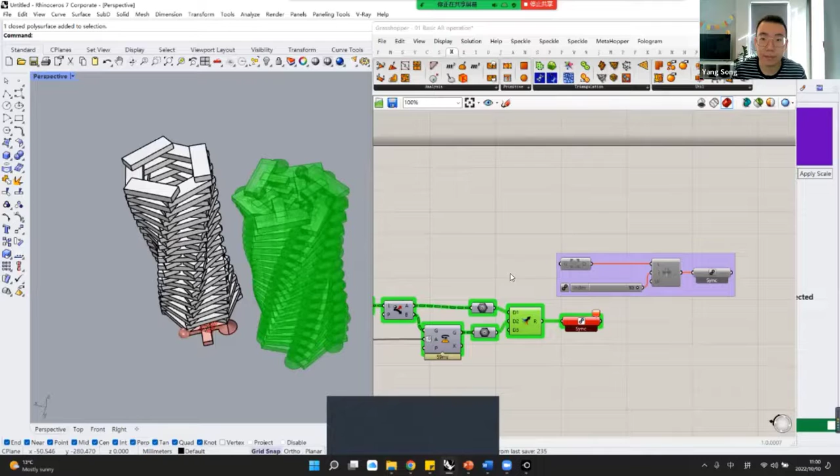Okay, so you're gonna see something happen here. You need to activate this group and connect the R to the G. So for now, let me delete this, you can see a more interesting design.

So you can play with the design instead of using your own component, and also you can try to color them into groups. For example, I'm gonna delete that.

There is a function in the sets, which is called List Item. So connect the L with O. Double click here, choose 0, which means the 0 group, which is the basic brick.

So we can go to the Fologram sync object. We can color it as red, and copy this.

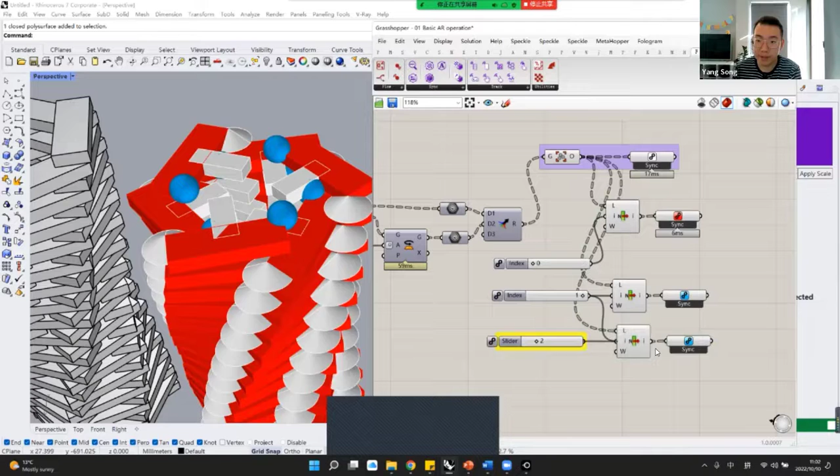Double click input 2, which means the second group is my cone, so I can set the cone as maybe yellow. Copy and paste.

Input 3, which is my short bricks, I can color it as maybe purple.

So you can do more interesting designs if you are using your own geometry. Just remember to group your geometry before you put it here, and ungroup it after you got the result. After ungrouping, you can choose the first, second, third and fourth geometry and color them into different colors. So this is something interesting you can play with.

If you have any advanced Grasshopper knowledge, you can do that and have a recording for that. If not, you can just do the basic things based on my file to play with the interactive parameter sliders to change the column height.

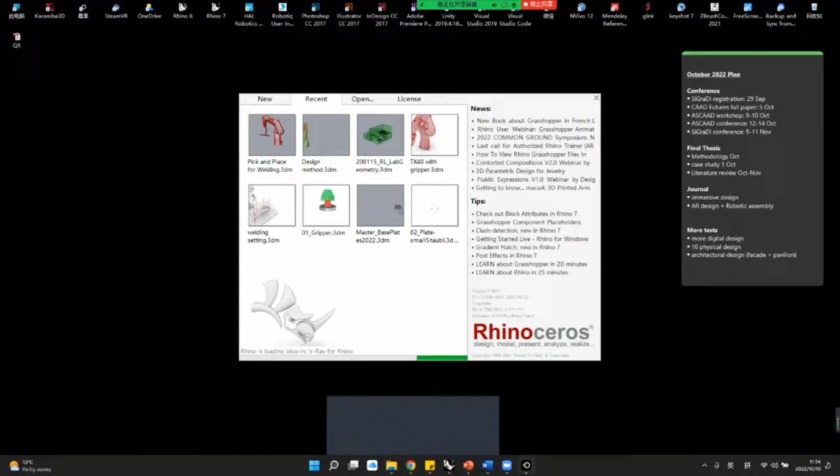Excuse me, when will you download the recordings? I think the conference will send you the recording soon, but I'm not sure what time you can get that. But I will demonstrate it now.

So if you don't want to wait for the recording, you can record that by yourself. So this is all the things you need to submit. For example, when you open Rhino, here is Grasshopper, click that, launch Grasshopper, and download my file. I think you have already got the link from my previous email, so just click that link. You will see two files. The file you need to download is the second one, this one.

So after you download the file, it is called Design Algorithm plus AR UI. Just click and drag that into Grasshopper, and you will see actually the design.

Some students had questions before, they are missing this kind of component. So if the component here is white, you can just double click here to input mesh area, and you will find the component here. Click here, connect the M with the G, connect the C with that C. That's it, this is the only problem related to the version of Grasshopper. So if you are missing this component, just double click here, input mesh area to find this component, and connect the G to the M, connect the C to that C. If you don't have that problem, it should be all fine for you to play with.

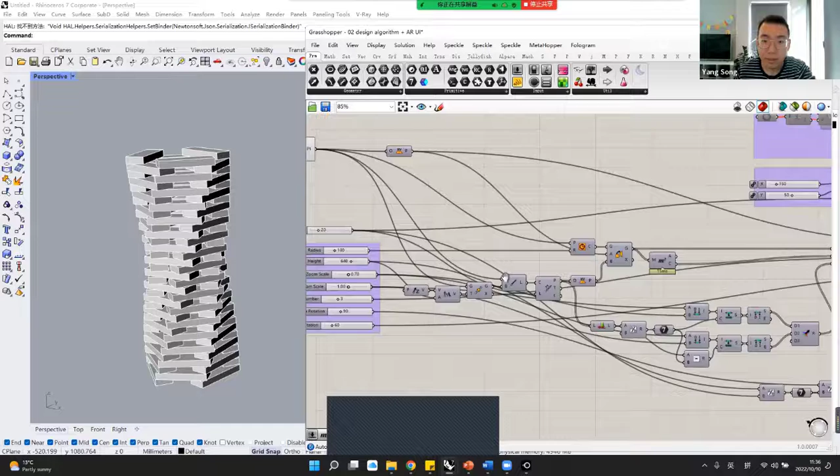So to activate that in AR, I'm gonna share my mobile screen. Yes, this is my mobile screen.

And I'm gonna put the physical marker like something here, so you can see everything clearly. Before you do that, just close the Fologram. I think I have already closed that. So, okay, Fologram.

Press here to generate the QR code. My other Rhino is in the Fologram. So remember, when you try to activate the Fologram, just open one Rhino.

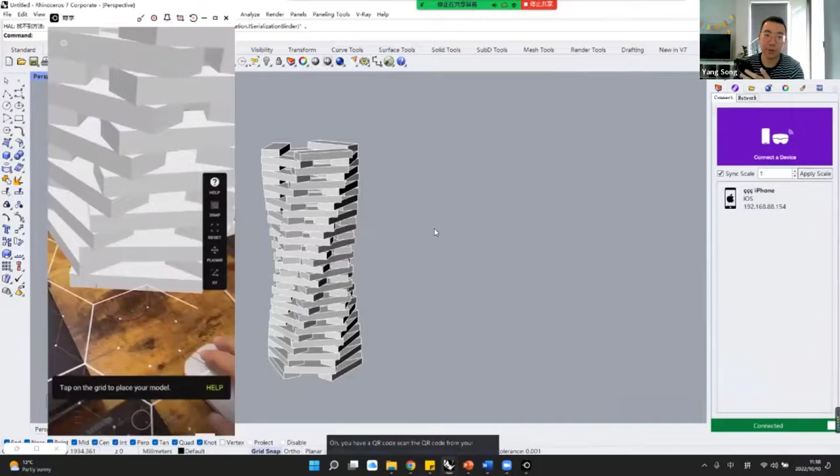So you have the QR code, scan the QR code from your phone, and you will see the hexagon, which is detecting the surface. Maybe you can scan on the floor and just tap the screen to select that surface. So now your column is on the ground.

And in Grasshopper, you have like 1, 2, 3, 4, 5, 6, 7, 8. You have 8 choices for you to play with, but you can only select 3. So for example, if you select the column height, middle zoom scale, and the column rotation, you can check that on the left-hand side corner.

Just press that. There will be the 3 sliders. So for now, you need to record the video for you to play with the parameter sliders, to have real-time modification in AR. So this is the thing that you need to submit, just a video recording for you to play with the parameter sliders.

And also you can change other parameter sliders, so don't play with the same 3 as mine, otherwise all the outcome will be the same. So actually you can change maybe the height of the brick, so now you can see the design is totally different.

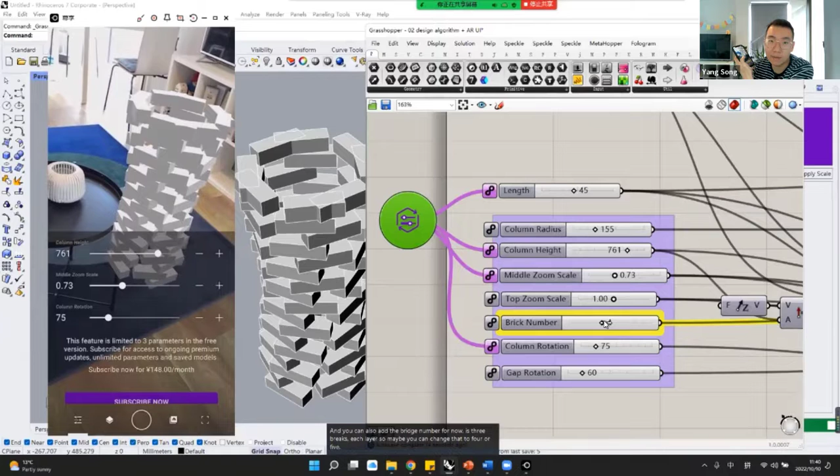And you can change like column radius, and you can also add the brick number. For now it's 3 bricks each layer, so maybe you can change that to 4 or 5. Just play with that, and maybe increase the length and increase the height. There are so many things that you can play with.

For now, if you think the height is reaching the limitation because now it's already 1,000, you can double click here, increase the maximum range. Maybe you can increase that to 2,000, which means it's gonna reach 2 meters. The same method, you can double click at the name of the sliders in Grasshopper to change the minimum and maximum range, so you will have more freedom for design.

Yes, you can just give a recording for that, like changing the parameters. And if you want to do more things, you can change the color, the texture to make it more unique or beautiful.

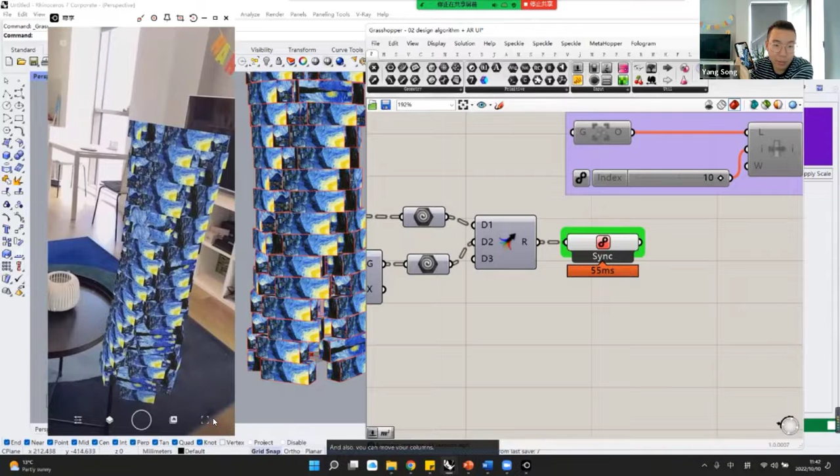Yes, you can see something very interesting. You can also move your column. Just press the right-hand side corner, and there will be a small square on your mobile phone. Press that and you will see a network. Just press your column and move, and you can use two fingers to scale it up or scale it down.

Maybe you can place your design somewhere nicely and take a photo of that. If you want to take a photo, just press the circle in the middle. So you can take a photo. Just try to play with that in AR.

So the first thing is to change the design, have a recording about changing the design parameters, and change the colors or textures. You can also press the right-hand side button to move that and scale it up and down.

To confirm your location, just press the right-hand side corner again, so it will be locked here. You cannot move that again. If you want to move it again, just press it again and move.

I think it's quite easy for you. Just play with the parameter, change the color or add some texture pictures, and move it to a nice place, have some photos with that. I think that's all.

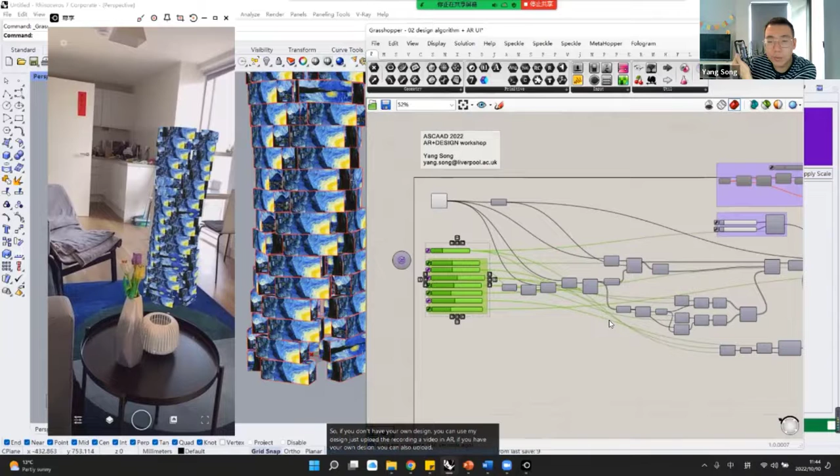If you don't have your own design, you can use my design. Just upload the recording video in AR. If you have your own design, you can also upload it to the file folder. You're welcome to create your own design, but if you can't do that in Grasshopper, just upload some video and some nice pictures of you playing with that in AR.

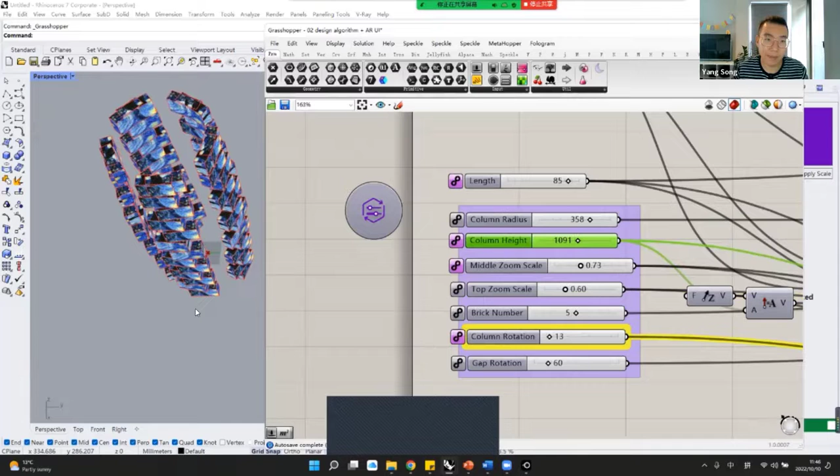So you can play with them. Even if it's not structurally reasonable, it's still a kind of design, so you don't need to think about any physical constraint. You can just show an outcome like that. I think it's kind of interesting. So just be playful with these kind of sliders, try to create something interesting. And remember to upload your outcome by the end of tomorrow.

Okay, I saw someone raise their hand, do you have any questions? Yes, you showed us an example of a project that applied physics to the bricks. Was that a plugin in Rhino, or did you use a third-party program? You mean the case study I showed at the beginning, with the bricks falling down and then you knew where to place them? Yeah. So that is another plugin.

Let me check, I think I've heard of it. I think it's called PhysX. You can get this plugin for Rhino, so I can show you that. They have some basic example files and tutorials, so you can download that and try to use it. You can find that on Food4Rhino, search PHYS.

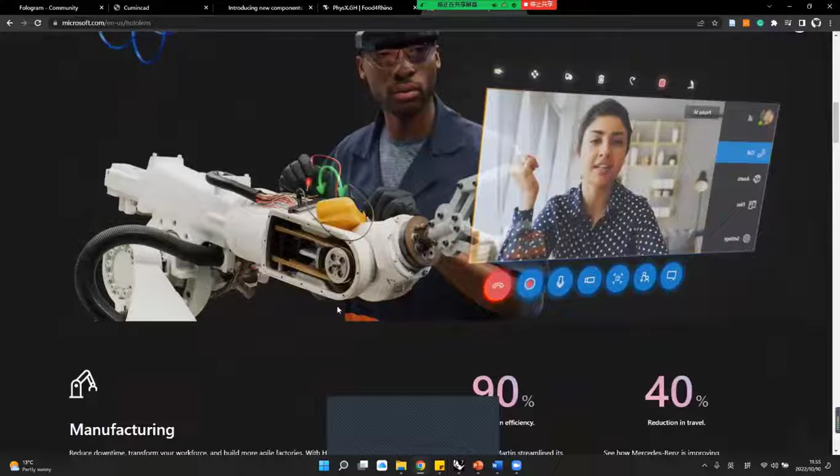Yes, thank you. For today's tutorial, it was an experiment for you to try AR in a cheap and easy way, because we only used our mobile phones. But if you're really interested, you can try the AR headset.

This is something you would see from the headset. I've tried the second generation, it feels really smooth and good. You can see virtual characters, play with them and with your models only by your hand gestures, because it can read your hand gestures.